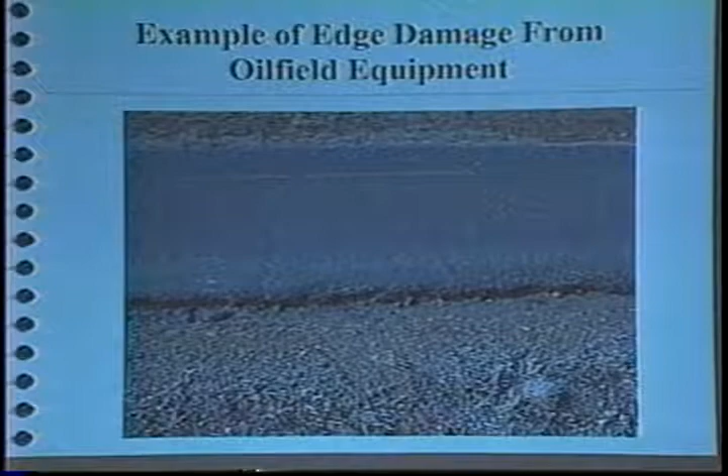The first thing, this is something that's not foreign to anybody. This is the typical type of edge drop-off that we have all over on our low-volume farm roads, those narrow farm roads. The thing about this particular road is it was a road that we were out there constantly pulling dirt back up to the shoulders and doing what we could to patch them up and stabilize them. In this particular case, this section right here where the edge dropped off about 1.5 to 2 inches, we'd been out there less than a month prior to this pulling it up.

When you've got, like everybody has, hundreds of lane miles of highway to maintain, you can't be out there every day. But I had about a 100-foot section, right next to a lease road where there was a lot of oil field traffic coming in and out and riding on that edge. For about 100 feet there, they had beat that edge back down into this condition, and that was the result of that 100-foot section.

That was a hot oil truck. They're big and square, not round, and they don't roll very well. They just kind of bounce, and that one went end over end several times and left the driver right in the middle of the road. Amazingly, the driver was sitting in the middle of the road, and he got up and walked to the ambulance, and they took him in to check him out, and last I heard he was okay.

I got to thinking about how much effort we put into edge repair, but it just doesn't seem like we get anywhere.

We're right back out there no matter how much we put into it, how good of a job we do. When we're on narrow farm roads with the kind of traffic we're dealing with, we're right back out there. And I was at the point where there's got to be a better way to do this.

And what are the best practices? Why don't we go around the state and find out what everybody's doing, and not only the state, why don't we go around the country, and do a literature review on other projects and studies that have been done about edge problems, and pool all that information together with some recommendations about material, methods, and equipment, and come up with a better way to patch edges.

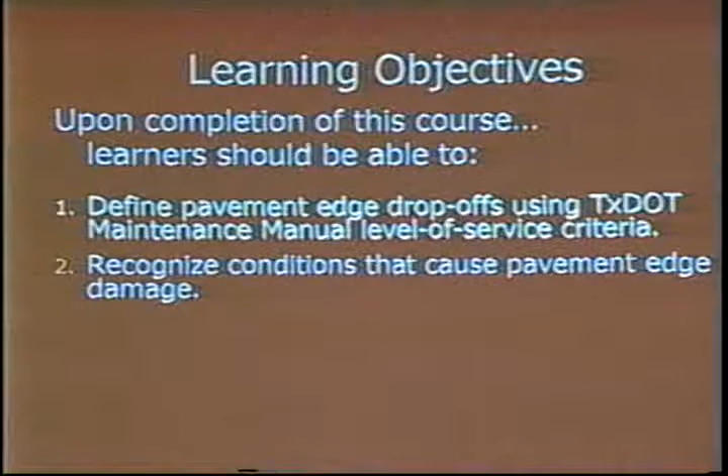And perhaps you might say, well, hey, I know all about that. But you may have some new people who come along and you need to be able to explain that to them. Hopefully you'll get some clear ideas about how you can communicate these typical things to look for. So this is an important part—if it's helpful to you, that's great, but I'm sure it'll be helpful for the new folks that come along. Distinguish among, select, and apply edge maintenance and repair practices and procedures.

I've never worked as a frame carpenter, but I know a few, and those guys walk around with a tool belt, and they've got a big hammer in it. Maybe it's their pliers, and they've got levels, and all kinds of tools in their tool belt. That's what we're talking about here, the tools you would have in your tool belt dealing with pavement edges.

This is what I'm going to present in this portion of the research: identify and deal with different types of edge maintenance equipment. Getting right on into tools, you can see how that would apply.

Edge maintenance planning tools. As Tracy mentioned, TXDOT spends a tremendous amount of money, much more than the 10-point-something million that he mentioned, on pavement edges. It's appropriate to do some planning to spend that money in a good way as stewards of state property.

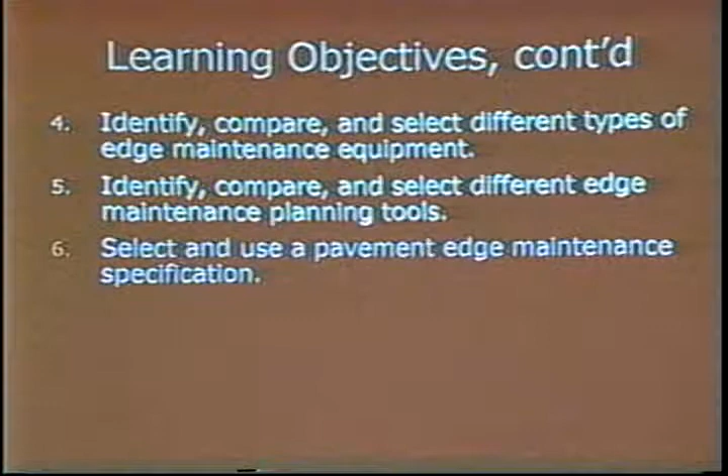We'll discuss a draft specification, the idea being that you may wish to contract out work like this or think about it, so we'll spend some time on that. And then finally, again, go to lifelong learning.

Having identified these objectives, this is an appropriate time to introduce some commentary from the director of your TXDOT Maintenance Division, Mr. Zane Webb. I have a brief two-minute film, which I'll show you here in just a moment. Zane's comments make it clear that this research on best practices for pavement edge maintenance is directly aligned with the policy and emphasis of the TXDOT maintenance division, the highest levels. So with that, let me roll Zane's tape.

The maintenance division is proud of the quality work they see from the TXDOT maintenance staff throughout the state. Everyone works hard, and we appreciate their efforts. Quality is not about us working harder — in fact, it's really just the opposite. It's about working smarter and efficiently. Maintenance accounts for 60% of TXDOT's budget. With this large a percentage of the budget, TXDOT looks to all employees to continually look for efficiencies and areas of improvement in their operations. To us at the division level, quality means results. It ultimately means doing the job right, being accountable. We pretty much leave it up to the individual maintenance sections on how to do the job. Sure, we're concerned about the final product, but how you do it is your decision. We encourage you to share successful ideas with each other and help us keep up the quality of service we provide the people of Texas.

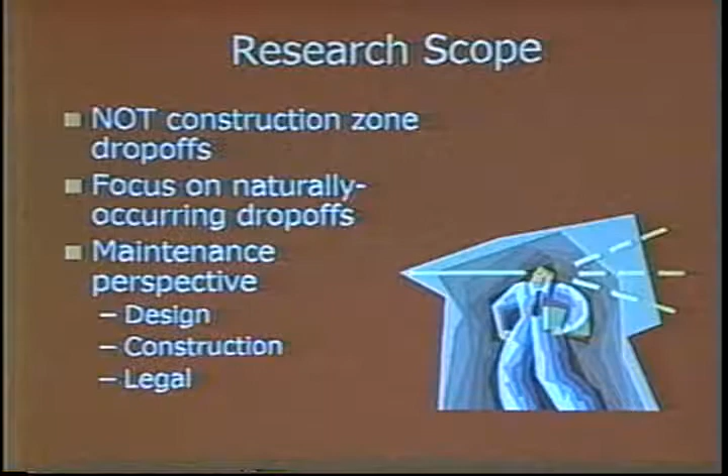We looked at both of these, but our primary focus and a lot of the emphasis of what we found, particularly in the West Texas area, dealt with low-volume roads without a shoulder.

And the way that we're doing this is through 7 regional training events, whereas I went to all 25 districts during the data gathering phase. The training phase, the implementation portion, I'm going out to 7 regional groups of districts. Our goal has always been implementation on this project.

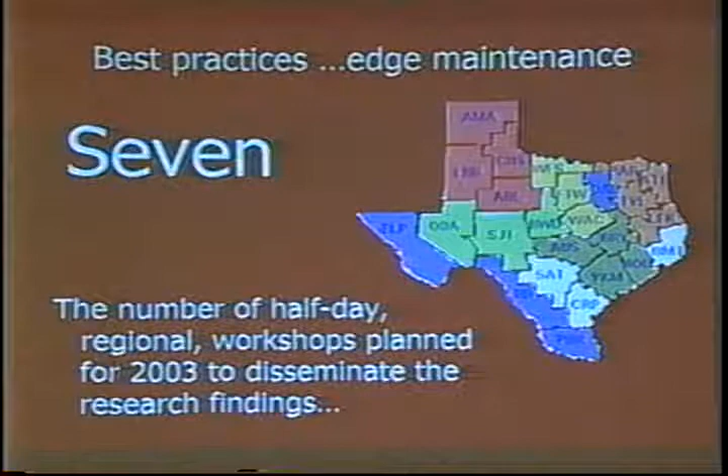We've always begun with the end in mind, that I'm going to have to talk to a group of maintenance section supervisors, assistant supervisors, crew chiefs, and other folks involved with the maintenance endeavor in the districts and in the maintenance sections, to talk with them about best practices for pavement edge maintenance, and that's what I'm here to do today.

Now that is the end of session 1. And if you're at the end of session 1 in your notebook, you probably will notice there's a pink sheet. This is a review sheet, so let's just talk about this for a minute. This is the audience participation time. There are 4 questions on the sheet, so let's just go through those and see if we're communicating pretty well. The first question, I always start out with the easy ones first.

This is my way. The edge repair research reflects the combined wisdom and experience of maintenance personnel from all 25 districts. True or false? That is true. That's exactly right. All 25.

Question 2, true or false? The research is primarily based on detailed statistical analyses of a lengthy questionnaire survey. True or false? That's false. That's exactly right.

We didn't litter. We didn't leave it on the side of the road someplace, but we had to get rid of that survey. That just was not an effective way to gather the data. We didn't do any detailed statistical analyses. We talked to people and we listened to people. That was our function, that was our goal - to talk and to listen, and then now to present to you the results of what we learned.

Question 3. Which of the following represents the key perspective? A, maintenance. B, design and construction. C, legal. D, all of the above.

I'm seeing a little bit of diversity in the responses I get on that. The answer is A, maintenance. Of course, we looked at all of the above. We looked at all of these, but our focus, the key perspective, is maintenance. This is for you. This is specifically for you.

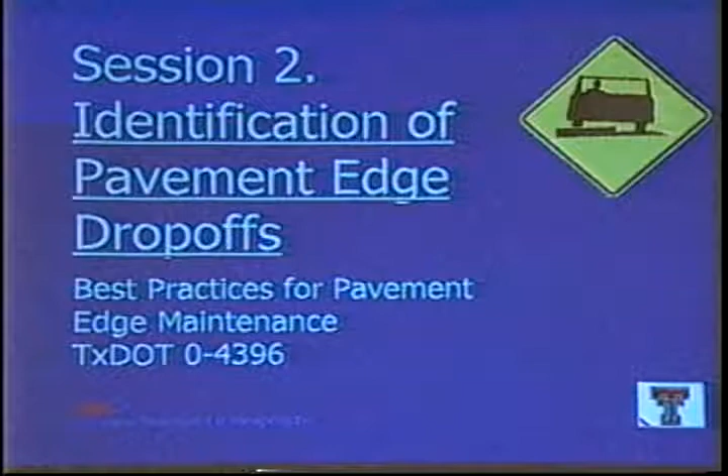Session 2 of this research deals with the nature of occurrence of pavement edge drop-offs, with a focus on identification. You might recall that we had 3 research questions showing here.

This session is quite important because it summarizes the findings from the first 2 research questions. The first 2 dealing with how to define or identify pavement edge drop-offs, and then the typical conditions that exist in the districts. I'm going to cover both of those in this one session.

The remaining sessions, sessions 3 through 8, deal with the third question, the best practices we identified in each district. But this is important because it identifies the context for the remainder of the training.

I'll basically cover this in 2 parts: first dealing with the identification of edge drop-offs, and then second, dealing with typical occurrences of edge drop-offs in the districts.

So here you have a picture and a number. What could that mean? What do we have there?

How are edge drop-offs identified in the districts? Well, the most common answer we got was 2 - the height of edge drop in inches, typically identified as the threshold for performing edge maintenance. This was the most common answer we got, but it was not at all the only answer, and in fact we had to continue to question to get people to say this, because this simple definition glosses over some key issues associated with pavement edge maintenance, and let me talk about those.

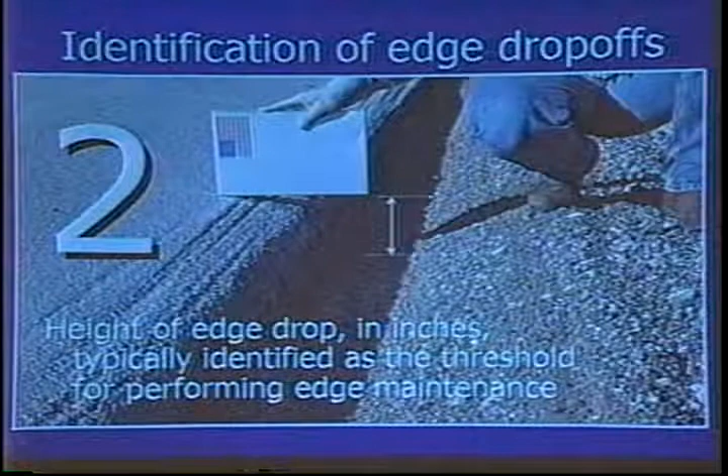Why is it important for us to think about this idea of how to identify pavement edges for maintenance purposes?

When we made our first site visit, we started here in Lubbock. Tracy Cumbie convened the group of maintenance section supervisors in the Lubbock district to visit with us, and he shared with me what I've come to call Tracy's Law: if you lose the edge, you lose the road. This is consistent with what Mr. Hopman was saying, that the key to successful maintenance for roads is to start with the pavement edges. If you keep the edge, then the rest of the road seems to go okay.

That makes a lot of sense. I've come to believe that this statement, Tracy's Law, provides a context for pavement edge maintenance. Everything we'll be talking about, if you think about it in terms of keeping that edge together, then you'll be doing well for the rest of your road. That context really is a mindset that I think you'll find very helpful when you get into pavement edge maintenance decisions. It helps you sort some things out and get some priorities clear.

So Tracy, glad you're here today. I should have had you say it yourself, but if you lose the edge, you lose the road. Now Tracy never claimed he was the first person to come up with this. In fact, many times today I'll share things, and the folks that shared it with me is the person I attribute it to, but you may know somebody who said it first. I'm not trying to misquote anybody, but I do want to give credit to the folks who were kind enough to share information with us.

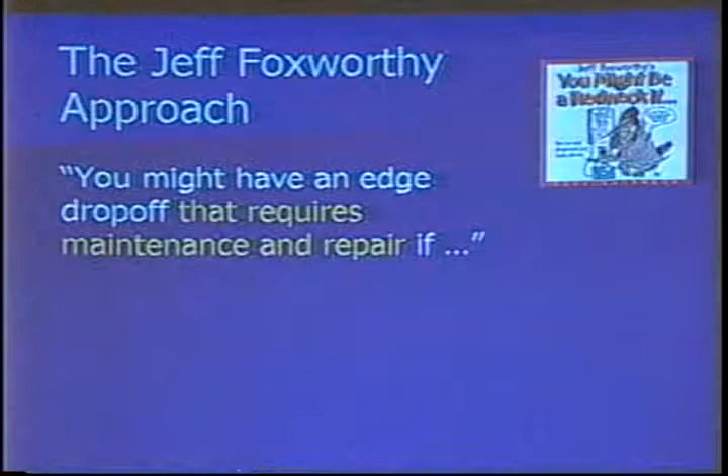I've come to call this the Jeff Foxworthy approach to identifying pavement edge drop-offs: you might have an edge drop-off requiring maintenance and repair if... Now, y'all know about Jeff Foxworthy, you might be a redneck if. I've got a list of some things here. You might be a redneck if more than one living relative is named for a Southern Civil War general. Does that apply to any of us here today? Okay. You might be a redneck if the primary color of your car is Bondo. This is one of my favorites: you might be a redneck if your family tree doesn't fork. That sends me. You might be a redneck if you think beef jerky and moon pies are two of the major food groups. If you had to remove a toothpick for wedding pictures, you might be a redneck. You might be a redneck if directions to your house include turn off the paved road. I like that one.

And then one of my personal favorites: you might be a redneck if you have a very special cap just for certain occasions that you wear. I like that one. I have a list here of about 165, and they tell me that if you hit on more than 20 of these, you might need some help. We might need some help. So I'll just keep moving.

But what I want to talk about is the Jeff Foxworthy approach to identifying pavement edge drop-offs. You might have an edge drop-off worthy of repair if, and it really falls into two categories. This is what you've told me.

The condition you see out there poses a safety hazard. This is what you all look for, this is a maintenance section way of looking at things. The second one is, not only is it a safety hazard, but there's more to it. What if the edge drop-off condition isn't a safety hazard, but it could cause damage to the road? That's something you've got to deal with.

Both of those criteria represent the thresholds you all look at when you ask, how do I identify pavement edge drop-offs? This is a classic and fully appropriate way for a maintenance section person to look at pavement edge drop-offs: is this a safety deal, is this going to cause damage to the road? If either one of those is true, then I need to put it on my list for repair. That's the way it's done.

Of course, there are other ways to do it. For example, written standards. Here's a picture, a nice edge drop-off there, about 8 inches, and a number 0.

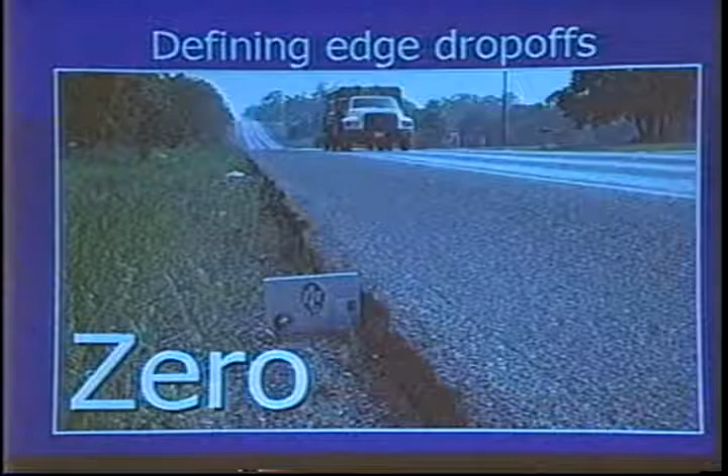What could that mean? Well, actually there are written standards for pavement edge drop-offs, but this is a typical number of written standards that you all identified when we asked, how do you identify these, are there any written standards out there? Actually, it was no, don't think so.

One of the reasons this is important in dealing with pavement edge drop-offs is that there are written standards for dealing with them, and they exist in various places, one being your maintenance manual, the TxDOT maintenance manual. So I've identified here a number 2, 3, and 3, and then a photograph showing an edge drop-off.

And the question is, what could that mean? Well, that is the TxDOT level of service definition for pavement edge drop-offs. Desirable: less than 2 inches. Acceptable: less than 3 inches. Tolerable: less than 3 inches.

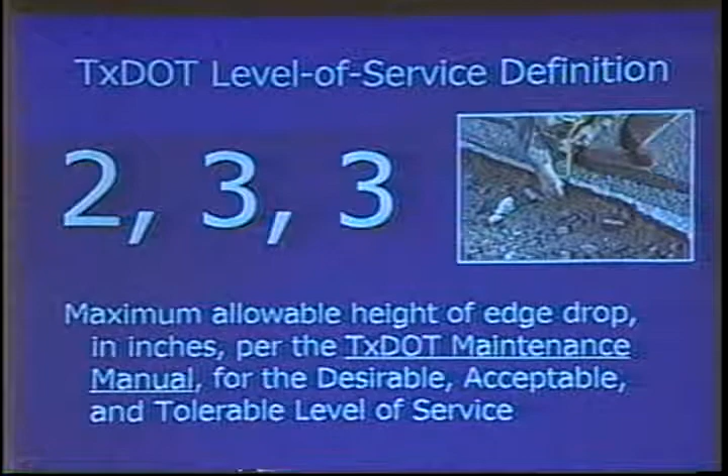And if you notice, after the page in your notes there's a handout, a Xerox of the page from your maintenance manual that presents this set of criteria. It says Section 2, level of service criteria. And on the back of the page you'll see a table in the middle of the page. It says pavement edges.

And under roadside maintenance, it says it is desirable to maintain less than a 2-inch drop-off, it is acceptable to maintain less than a 3-inch drop-off, and it is tolerable to maintain less than a 3-inch drop-off.

What that tells you is your maintenance manual, which is the way you've demonstrated or stated to the citizens of the state of Texas that you're going to maintain the roads, tells you that ideally you keep drop-offs less than 2 inches. And if they get worse than 3, you've said you're going to do something about it.

That's a written standard. Now the Jeff Foxworthy approach, safety issue or damage to the road, that's a maintenance section supervisor approach, and the facts are you've got to deal with both. The Jeff Foxworthy approach makes perfect sense from a maintenance section perspective. The written approach is required because it's in your maintenance manual, so you're legally obligated to do it.

And so anytime you end up in a legal situation, like this picture Tracy showed us of the oil field truck turned over on the road, and there's any kind of question in the court system about whether there was a problem or not, they're going to pull out this maintenance manual, pull up this table, and ask, is that greater than 3 inches? And if so, well guess what, that's not a good thing. So both of those are required.

And this is particularly required. I want to talk about this at various times today, but I just want to plant the seed now that this is an objective of the research: for you all to become familiar with and to know that these are the required standards for pavement edge maintenance per your maintenance manual.

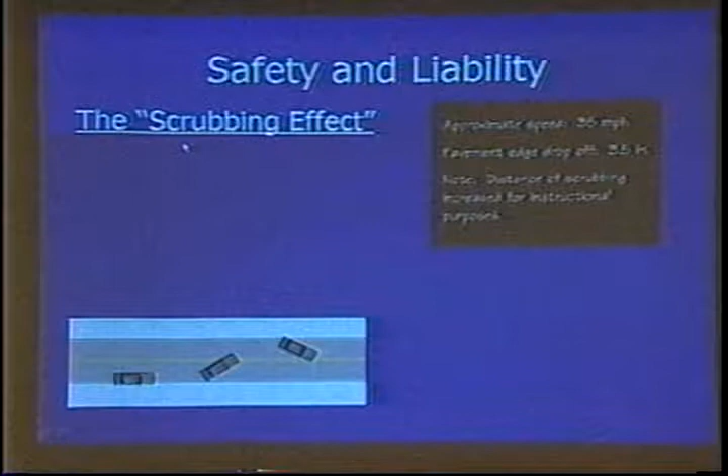One of the things I want to emphasize now, and why this is so important, has to do with something called scrubbing, the scrubbing effect. What is scrubbing? Why is this issue of pavement edge drop-offs a concern?

Let's think about how this works. Tracy's picture of a truck was very instructive when we started this. If you're driving along a section of road, say 100 feet, where there's a drop-off on the side, and for whatever reason you're looking over at some cows or a buck or deer, something that captures your attention, and you drift off to the side, your wheel drops off the edge and there's a drop-off there.

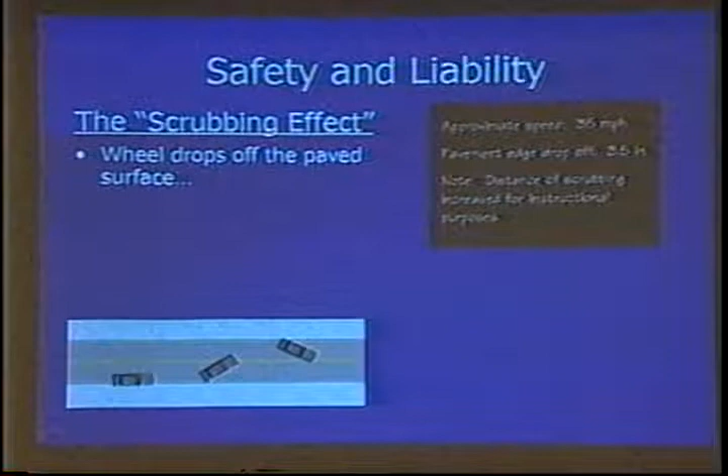Hopefully, being an experienced driver, you wouldn't try to just jerk it back on. You'd drive along with it for a little bit, then try to steer back up onto the pavement surface, to mount it. When you do that, the right front wheel — the one that's fallen off — encounters that pavement edge.

You've got the flat surface of the tire hitting square up against the pavement edge, which acts as a barrier putting force against the tire and keeping you from mounting the pavement. So you have to steer into it harder, continuing to increase your steering input until you get back up on top of the pavement.

What happens is, once you put enough steering input in, that tire, in one wheel revolution, goes from nothing to fully on the road. The vehicle automatically jerks way over to the left, as shown in this graphic. That's called scrubbing — the tire scrubbing against the face of the pavement. You can see how the vehicle yaws off far to the left, and if there were a vehicle coming in the opposite direction, that would cause an accident.

Or even if there weren't a vehicle over there, it might be difficult to recover from that and cause a problem. Well, this is a legal issue.

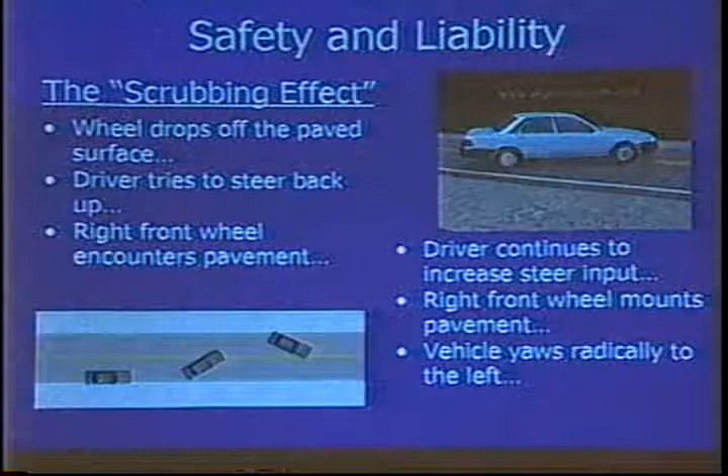Collision could occur, and that's a legal issue. And so this brings back the whole reason of why the level of service criteria are important. This is really what they're getting at.

The other thing I want to do to emphasize the importance here is to note that legal research tells us there is no consensus on the correct or allowable pavement height for edge drop-off for a naive driver. But they always say 3 inches, more than 3 inches is a bad thing. So notice what your tolerable level is: 3 inches, got to be less than 3. That's where that came from, is this research.

Also, it's desirable to limit the edge drop-off to less than 3 inches. Desirable, less than 2 inches. This is where your level of service criteria came from. It's intended to meet the issue of scrubbing, where a motorist driving along, the tire falls off the pavement edge and they get back on, nothing bad will happen. That's the whole idea behind it. That's why.

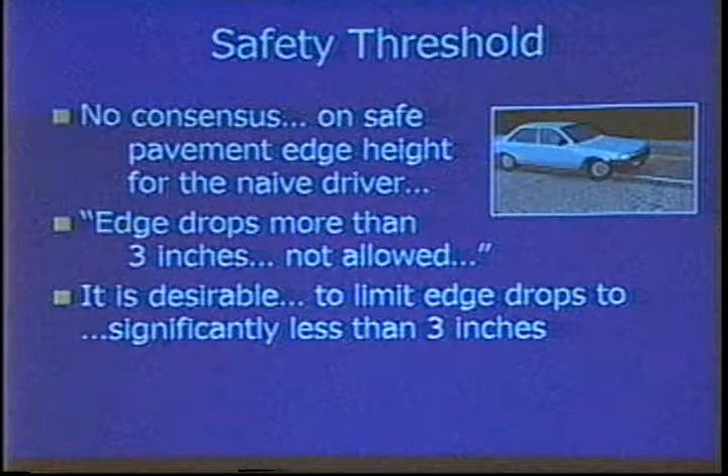And so from a maintenance perspective, not only must you think about this in terms of safety issue and damage to the road, but you also have a challenge before you to think about it in terms of the level of service criteria, because that's another obligation that exists in your community in terms of what you do to maintain your pavement edges. It's what your documents say that you'll do, and so it's important to think about it and focus on that.

Now, this brings up a good news, bad news deal, this idea of TXMAP rankings and pavement edges. You know about good news, bad news deals. I suppose there are 1,000 stories that start with, you've got some good news and some bad news.

One of these things that I get a chuckle out of: there was this guy, he goes to his doctor for a visit, and the doctor says, what is it? He says, well, I just don't feel very good, doc. I'm just not able to do the things I've been able to do. He goes, well, let's do some tests, let's do some blood tests, let's check you out. The guy says, okay. So he submits to all the tests, and the doctor runs them and says, I'll get back with you. He calls the fella in a few days later and says, well, I have the results in, and I have some good news and some bad news. The fellow's sitting down. He says, well, give me the bad news first, straight up, don't pull any punches, I need to know. And the doctor says, all right, I'll tell you, it's brain cancer, it's a large tumor, it's gone to your lymph node system, inoperable, there's nothing I can do. You only have a year to live. That's it, set your affairs in order. And the guy just kind of dies in a pile right there, and he goes, doc, how in the world can you possibly follow that up with good news? And the doc says, well, as it turns out, when we were doing our studying, we also found you have an aggressive case of Alzheimer's, and in 6 months you won't know what's happening to you. So it's a good news, bad news deal.

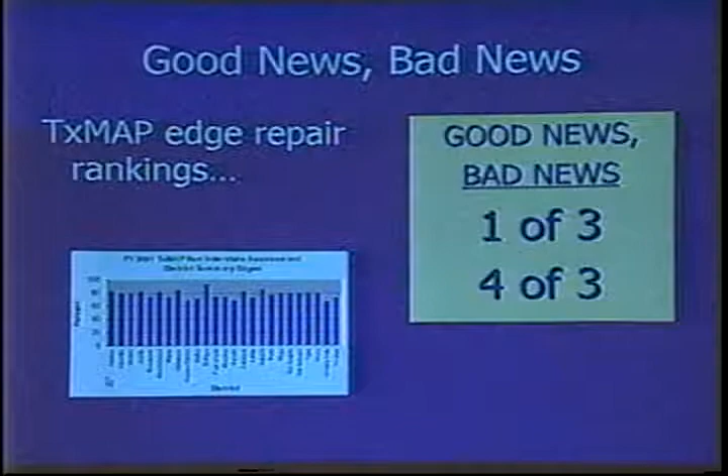But the bad news is if you make it on the bottom of the list on edges, you are the bottom of the list overall. Let me tell you what I mean by that. Of the bottom 4 districts for edges, 3 of those are the worst on overall ratings for TXMAP in the state.

If you made the bottom of the list in edges, you're the bottom of the list overall. Understand what I'm saying? If you lose the edge, you lose the road. That's what that tells you. That's the bad news. If you make it to the top half of the list, you might make it up there in the top 3 overall. But if you make it on the bottom of the list, that's where your problem is. It just straightens it right out. If you lose the edge, you lose the road.

Now, I told you I was going to discuss this session in 2 parts. The second part has to do with typical edge drop-off conditions that we identified as we visited throughout the districts. Let's talk about this as you've got to know them when you see them. So let's move on and talk about that for a minute.

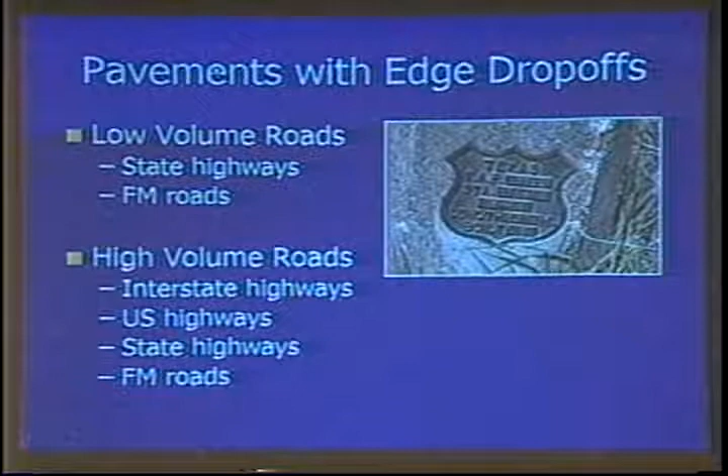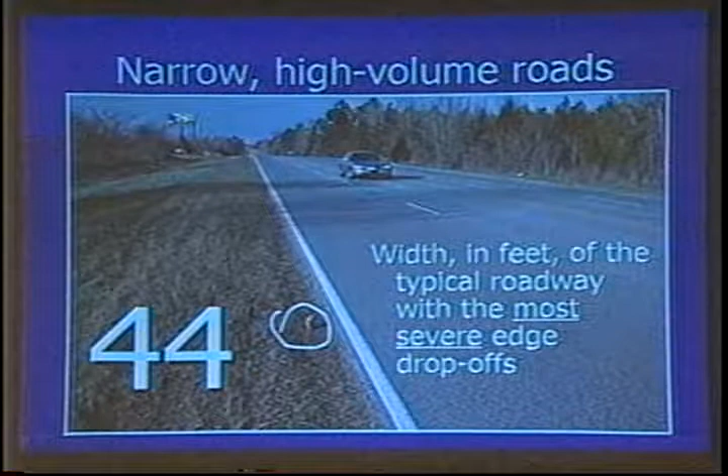We saw lots of things that affected pavement edge drop-offs. Again, we didn't do any detailed statistical analyses, but the unscientific top 3 were these: the idea of narrow roadway, specifically narrow roadway without shoulders, and then abusive traffic, and then adverse environment. Now, time won't allow me to go into everything we learned here, but what I'm wanting to point out is that a number of factors cause pavement edge drop-offs.

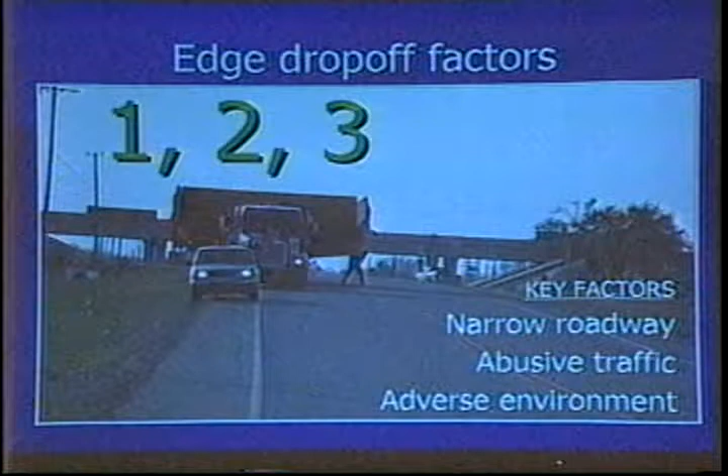Well, this isn't just the Laredo thing, though. Here in West Texas, Tracy mentioned oil field traffic. Well, there's also cotton module traffic. You all have seen that. In Central Texas, it was moving homes, mobile homes, wide traffic like that causing problems. In East Texas, it was boat and RV traffic going out to the lake. Also in East Texas, timber haulers. In Dallas and Fort Worth, it was the soccer moms and their SUVs, taking the kids, just driving, lots of traffic. It was always something.

The problem is consistent. It's just that the cause of the problem in terms of too much, too wide, too fast exists. Traffic is always an issue. What it amounts to is you have a FM road system that's 50 or 60 years old at this time, designed under the program Get the Farmer Out of the Mud, back at a time when the trucks for farm traffic and those sort of things were a lot smaller and slower than they are today. And the world we live in today, 50 or 60 years later, is a lot faster. The equipment is larger, heavier, and it just does damage to the roads. That's what it amounts to. So you have a kind of system overload problem, and that's what you're up against, facing that kind of challenge of dealing with the system overload problem from a maintenance perspective.

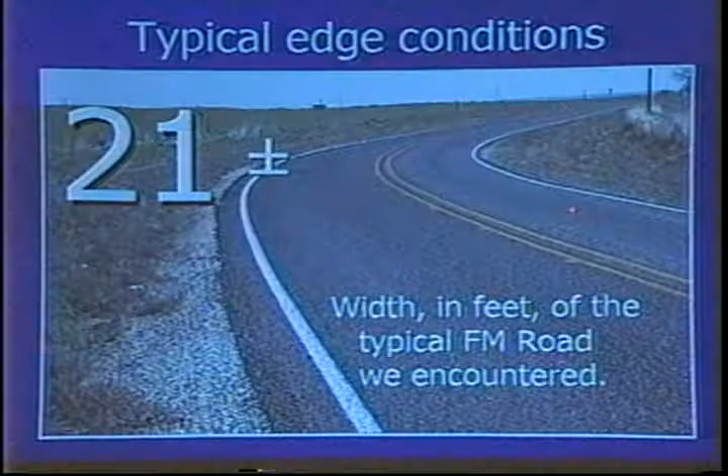You know, Tracy mentioned that I did a nationwide literature review. And I also not only did that, I called people, a sampling, maybe 15 or so of the equivalents of the Zane Webbs of the other states. I'd call and talk to the director of maintenance for the state and ask them what they thought about edge drop-offs, and I was talking about edge stripes. And the guy said, 'You're not from around here, are you, son?' And I said, 'What are you talking about?' He goes, 'That's not a stripe, that's a line. This is a line right here.' And I said, 'Oh, okay, I'll start calling it a line.' And so I've been corrected.

This idea of edge drop-offs, there are certain places where that shows up more frequently than others. For example, inside horizontal curves, intersections, approaches to hills, etc. I have a few photographs that show those, and I'll just go through those for you right now. And again, I'm thinking that you all might say, well, yeah, I know that. But the idea is that if this is something that's real familiar to you, then it also might be helpful for you when you go back to your maintenance section and you're talking to the folks that are coming in, new hires or whatever, and you're wanting to train them and share with them.

These are things to look for. And I might just say that I would attribute this to a guy named Bill Boatwright. Some of you may know Bill Boatwright. He's in the Laredo District, maintenance section supervisor there, and he's a very observant fellow. He's just a real careful guy, pays a lot of attention. He was talking to me about how to tell when a buck deer has achieved its full prime in terms of the size and weight of the horns, its spread and all that sort of thing, and how you can tell the difference between a 5-year-old and a 7-year-old. He's just a very observant person.

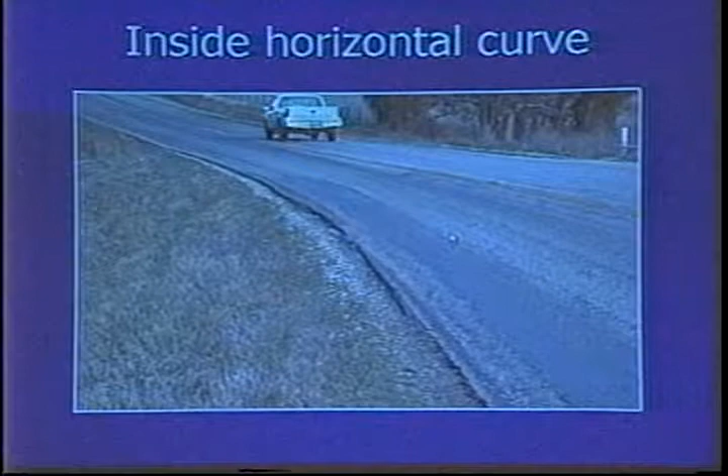He carries that same level of observation skill over into identifying typical ways where you identify edge drop-offs. Some of these things he specifically talked to me about as something to look for. That's what I'm talking about. I mentioned that the most severe edge drop-offs were the poor boy 4 lanes, but the most common that we saw across the state was this right here, inside horizontal curve of a narrow FM without a shoulder. This actually happens to be in Mills County, but it could have been anywhere in the state. Probably 3/4 of the districts identified this as the most common thing that they saw in their maintenance sections. So this is a problem, narrow FMs inside of a curve.

Another one, and this didn't occur to me at first, but it makes a lot of sense: it's the approach to a vertical curve, and that's what you see here. Notice that you have a narrow FM.

This happens to be in Hartley County, ADT 220 vehicles per day. They've been doing some edging there, but notice that along the side of the road there's a wheel path as you go up the hill. If you're driving along on a narrow road like this, you don't know what's coming across the other side, so you'll instinctively pull over because you don't want to encounter that on a narrow road. Anywhere you approach a vertical hill, you're going to see a propensity for edge drop-offs like this, wheel paths right along the side of the road. Very common. That's a 21-foot wide road.

This is not a narrow road, but it is a problem. This happens to be in Wise County, and ADT here is 5,200 vehicles per day. This road has 12-foot travel lanes and 5-foot shoulders, and it's got about a 4-inch drop-off along this area. Real good, strong subbase - not rock, but a real stable material.

What happens is when vehicles are driving along and there's a place of business over here and they want to turn left, they just stop and wait for the oncoming traffic to get out of the way, then make their left turn. And those folks out in this part of the world are impatient. So instead of waiting back behind for the person in front to turn left, they pull over, take one set of tires off the pavement, and drive around and pass on the right. Creates a serious edge drop-off problem. In that sense, the shoulder kind of is an attractive nuisance, whereas shoulders are typically a good thing. In this case, the shoulder ends up providing a stable base, so they feel like they can pull over and get away with that, and they do. It causes its own brand of edge drop-off problems.

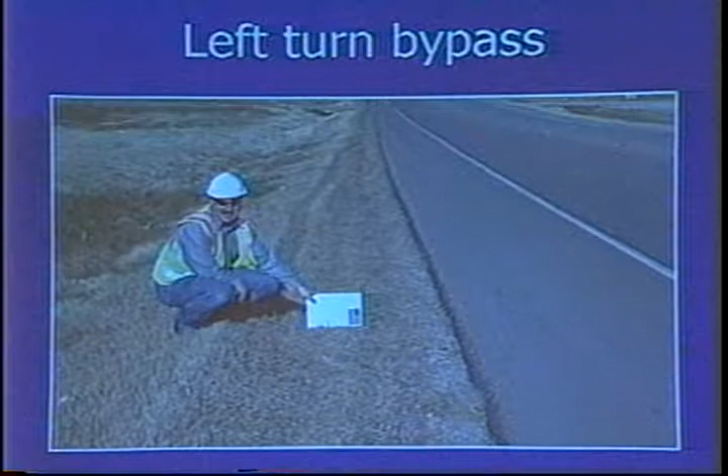Illegal in urban and metropolitan areas, this is a problem - people just turn wherever they want because they can. This happened to be in Bexar County, on the interstate highway. Notice the edge drop-off here where people are making illegal turnarounds. The district or maintenance section folks ran post and cable, and wherever they stop the post and cable, they get the illegal turnaround. They run it back a little further, and they get another one. That's a continual battle for them.

That's not a pretty picture - this is a truck pull-off. Again, this is a service road for an interstate highway. Trucks pull off, check their load, do whatever it is they need to do, and just trash the edges. A lot of times this happens underneath bridges. In the high traffic areas, it's a very common edge drop-off problem.

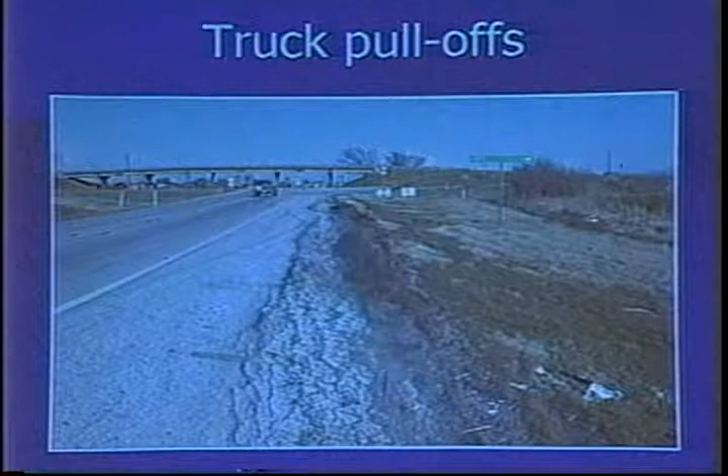We did no sophisticated statistics, but what I would say in general is that the severity of the edge drop-off is positively correlated with these factors: no shoulders, narrow pavement width, narrow right-of-way, abusive traffic, heavy traffic, age, erodible subgrade, precipitation. As you start seeing those factors show up, you start seeing your edge drop-offs get worse.

Now, the neat thing about the state of Texas is that in most places, most of these factors don't occur at the same time. When you really start having serious, awfully bad edge drop-off problems, it's when all of these occur at the same time, because there's nowhere to go with it. Most districts have their saving graces - either their soils are good, or the traffic's low, or they've got plenty of right-of-way, or whatever. But some places, and there are a few, have all of these bad at once, and those places have some really serious problems. That's not y'all - y'all have your own share - but there are some places, believe me, where folks have every one of these. It's a bad, bad deal. So the severity of the edge drop-off is going to increase as you see these factors exist, both in number and in severity individually.

Okay, we are to our pink sheet, and I'm pretty close to on time. We're going to get you a break here in just a second, but before we do, let's go through our pink sheet. What is Tracy's Law? Question 1.

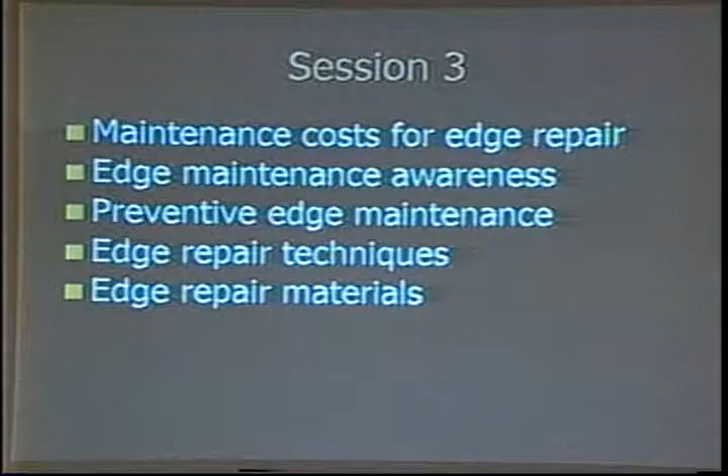In fact, according to your data that I got from Joe Graff, y'all spent $11.4 million in 2001 on edge repair, function code 270. But the point of this little exercise is to illustrate that you do much, much more than function code 270.

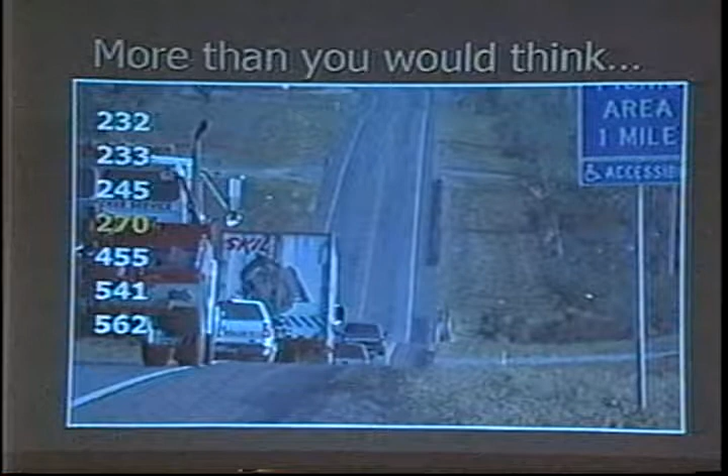One of my favorite photographs from this, I just like it. I don't even know what it is I like about it, but it is a nice photograph. Notice along the left side there some other numbers. Those are also function codes. What function codes are those? Well, they're common edge repair function codes.

When we went to the districts, we heard about 22 different function codes mentioned. When we've asked people about edge maintenance, what do you do? They say, we do this. Well, what function code do you bill it to? Well, I'll do this. 22 different ones.

And these were the best of show right here. Of course, 270 being front and center, that's a no-brainer. But these others were very commonly used. And you can see how some of these make a whole lot of sense for edge repair. Now, some of them include more than just pavement edge repair, too. For example, strip seal.

Y'all don't just do strip seals on the edges, but you do strip seals on the edges. And so maybe that's not all associated with pavement edge maintenance. Fog seal, same deal. What about adding and widening pavement? Well, that's probably edges. Pretty hard to get away from it there. Reshaping unpaved shoulders, that's edges. Chemical control of vegetation, control of edges, reshaping ditches.

These are all very common, the most common, in fact, that we encountered. So if you look at this, my point is those 7 edge repair function codes, instead of just $11.4 million, that's about $40 million. You say, well, you didn't use $40 million. Yeah, because not all that's edge repair. But a lot of that's edge repair. I even go so far as to say most of it's edge repair.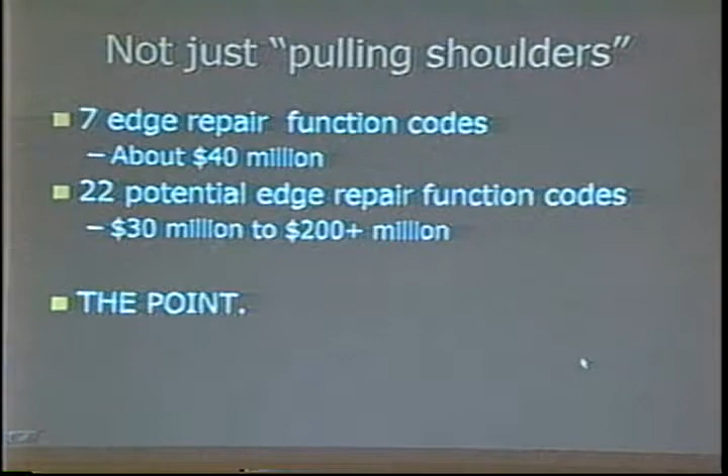Plus there were 22 different function codes that were identified, and if you add the 22 together, it's $217 million, all of those. Now, y'all didn't spend $217 million on edges, but you sure didn't just spend 11. So maybe you spent 50, maybe you spent 30. The point of this little exercise is to point out that you all spend a lot of money on pavement edge repair, a lot more than just function code 270. That's the purpose of this illustration.

So it's a significant part of what you do. It's not just one thing, it's a big part of what you do. And so from this point forward, I want to present to you the best practices for pavement edge maintenance that we identified in our research study.

I'll begin with awareness. Now, when I began the research, I did not initially think about this as a best practice for pavement edge maintenance. But when we started looking at all the things that are done in this area, it became clear to us that some of the techniques that you all were involved with were really just awareness things, keeping it in your mind, and really to a large extent keeping it in your mindset and thinking about it from the perspective of this is an activity that's important associated with maintenance in your sections. That's a big deal. So let me talk about some edge maintenance awareness things.

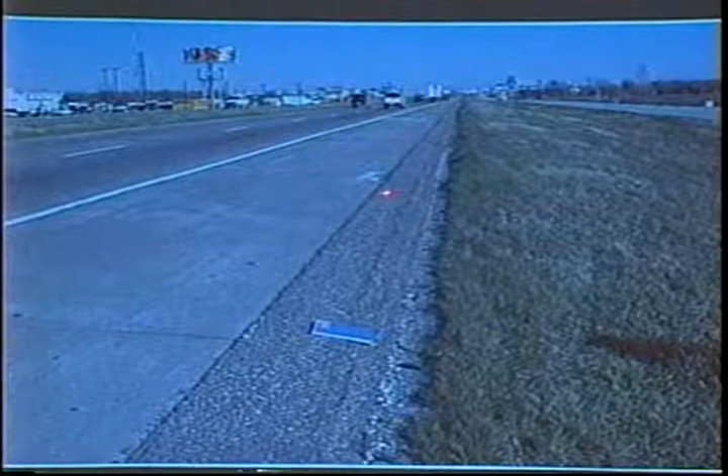One of the first ones we encountered had to deal with the design phase, focusing on edge maintenance details. Let me draw your attention to this photograph. This is in Rockwall County, Interstate 30. Notice this is a concrete pavement structure, concrete shoulder and travel lanes, and then notice right here on the edge this strip. Well, that's an asphalt wedge. Okay? That's an asphalt wedge.

This is an excellent design detail for a high-volume road. The reason it's excellent is that the subbase for this pavement doesn't stop at the edge of the shoulder, it comes out to about here. So you have this zone between the edge of the shoulder and the edge of the subbase where nothing really will grow, and they put in an asphalt wedge.

So they're not going to have an edge drop-off problem there. This was one of the sections on Interstate 30 we looked at. Unfortunately, we also looked at other sections on Interstate 30 built after this where the person who did the design didn't think about pavement edges. This is why this is awareness. It's thinking about it.

What that person did is rather than put this wedge here, they put nothing. So instead of a slope from the edge of the shoulder to the edge of the subbase, they went straight across and then up vertically about 10 or 12 inches, whatever the thickness of that concrete was. Then they said, well, we'll blade soil over in there and try to get something to grow. But it just isn't growing out there. It's just not working. So they have a continual edge maintenance problem on a road that was brand new. That's an incredibly frustrating thing for you all to deal with.

It all comes down to introducing the idea of edge maintenance in the awareness phase into the design. We saw more places than I'd like to mention where design details on a new, basically rehabilitated, road ended up causing you maintenance problems from the get-go, when it should have been one you didn't have to worry about for a long time. That's what I'm talking about when I'm talking about awareness.

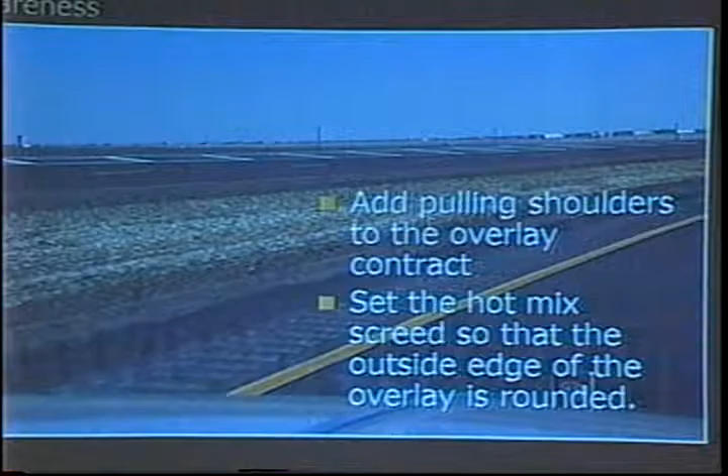The thinking of the folks in Brownwood on this course as an edge maintenance awareness practice is that you've got a lot of roads to look out for and a lot of problems to deal with, so you're always having to make judgment calls on where to put your effort, where to put your emphasis, because you've got more than you can say grace over, as we look at it. Faced with that kind of decision, how do you make the call? Well, if risk and liability to TXDOT figures into the picture, and it does, this course sensitizes you to the kinds of risks and liabilities associated with maintenance operations, one of them being pavement edge drop-offs.

So the Brownwood District sends all their maintenance section supervisors to this course, and they commend it to everybody. They say it was money well spent, that everything you do on a daily basis deals with this, and they liked it. So I pass it along to you as an idea to think about.

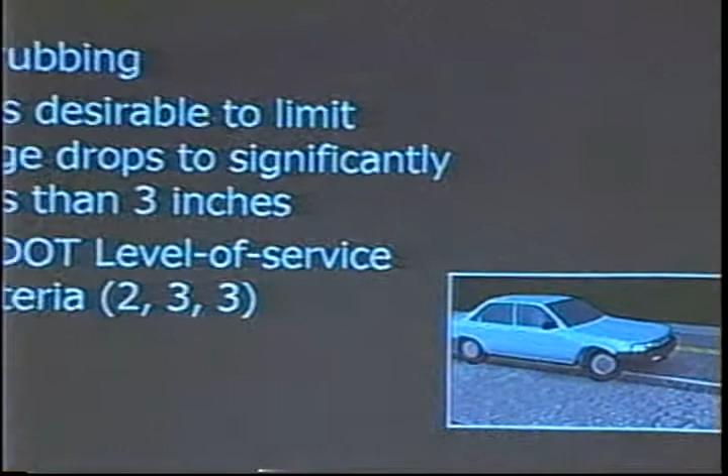I've already talked with you about this liability thing. I want to talk about it a little bit more formally because I was curious. One of the things you hear a lot about is: is there a liability issue, or not? I really wanted to know.

So I talked with you about scrubbing. What I did was go to the Texas Attorney General's office, where they have an assistant attorney general named Ron Garner, who's in charge of dealing with this kind of issue for the Texas Department of Transportation. I asked him, what records do you have dealing with pavement edge drop-offs? He gave me the typical thing, like 'if I told you I'd have to kill you.' I said, well, don't go there.

Well, anyway, he did look. They keep records, some of which they're willing to share and some they can't because those projects or cases are still open. But of the cases closed over the past 10 years, he sent me a table, and this is a summary of it. I have that information in my hands, so let me go over it with you. He said since 1990, they've tried 35 cases.

Now, he wasn't willing to talk about cases he was still dealing with. Of the 35 edge drop-off cases, 13 were in a construction zone, 10 were not in a construction zone, and for 12 it didn't say one way or the other. The edge drop-off height ranged from 2.1 to 8 inches.

Let me read through a few of these with you: loose gravel with edge drop-off; soft shoulder edge drop-off, a mowing maintenance problem; 4-inch sloped edge, muddy shoulder; 4-inch sloped edge drop-off; 5-inch sloped edge drop-off; 8-inch edge drop-off, open and obvious; 2.1 inch drop-off; 3 inch edge drop-off; 4 inch sloped edge drop-off; 5 inch sloped drop-off; 8 inch edge drop-off.

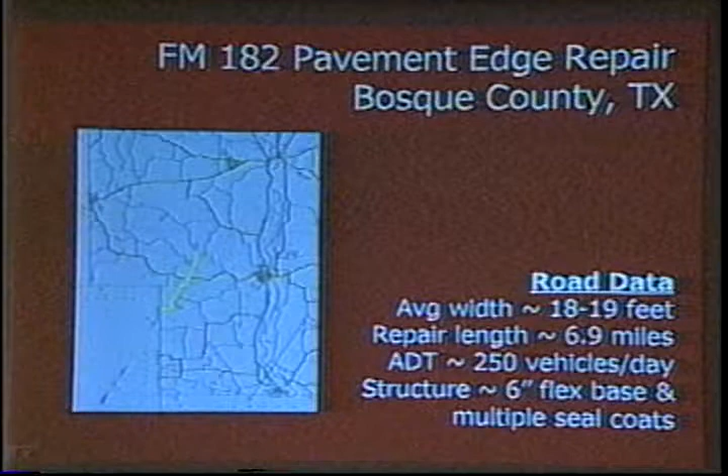This is FM 182. Typical width of this road, 18 to 19 feet, because the road base crown was wider and the edges had broken off, so they just didn't have as much road as they wanted. They wanted to rebuild those, and they had about 7 miles of road which they rebuilt. The defect was pavement rutting and pavement edge damage. That's what they were trying to correct, again on the existing base crown. So let me roll that tape for you.

This is what some of our edges are looking like before we fixed them. Just a good drop off and narrowing the road, chewing off the edge of the road.

First step here, we heel the dirt away from the edge of the pavement. We're just cutting off the edge of the pavement and edging out the loose stuff about 2.5 inches deep. It makes our hot mix lay a lot better.

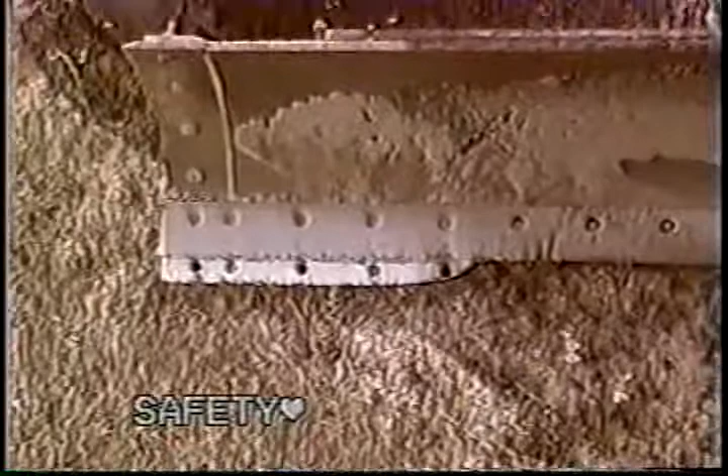This is what we're using to heel off up against the curb, edge of the highway, where we're coming back and putting hot mix on it, repairing the edges. This is about 2.5 inches lower than your grader blade, and it heels it off pretty good, gives you about a 2 to 2.5 inch depth for hot mix going back on your edges.

I'll show you in a minute kind of what we're doing. This is what it looks like after we heel it out. Gets us something to work with to put a reasonable amount of material back in its place.

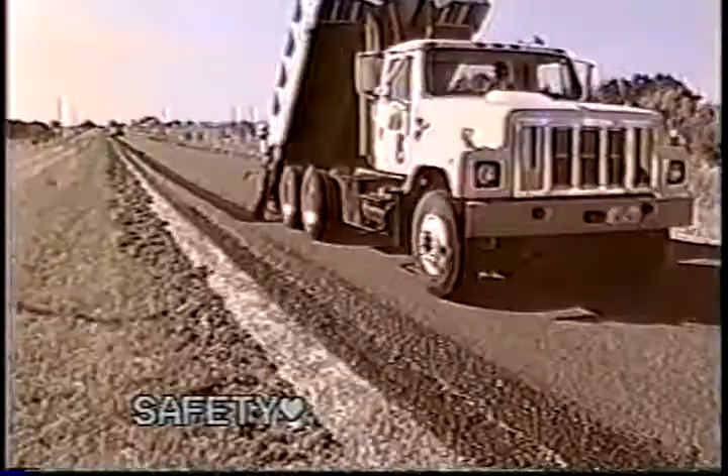Then we're going to come back and we tack the edges of it, the edge of the road. This is our conveyor boxes that we bought to put on. They sure do work good.

Then we come along and we put a windrow. We got our motor grader with a little box built on one end. It's sitting at an angle, and we just windrow that out to the edge like we want it. If you'll notice, Bobby's doing a good straight job on the edges, and that picks up all these edges.

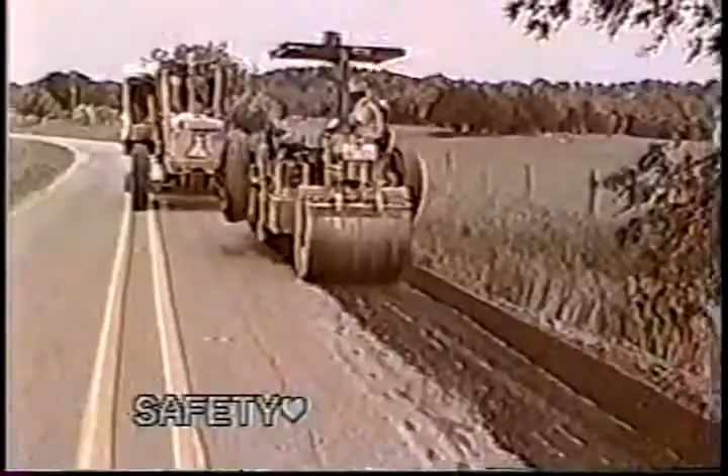And our maintainer comes along and knocks the road down. During this operation, we are cautious about the operator not breaking over the edge of this. It keeps it nice and uniform.

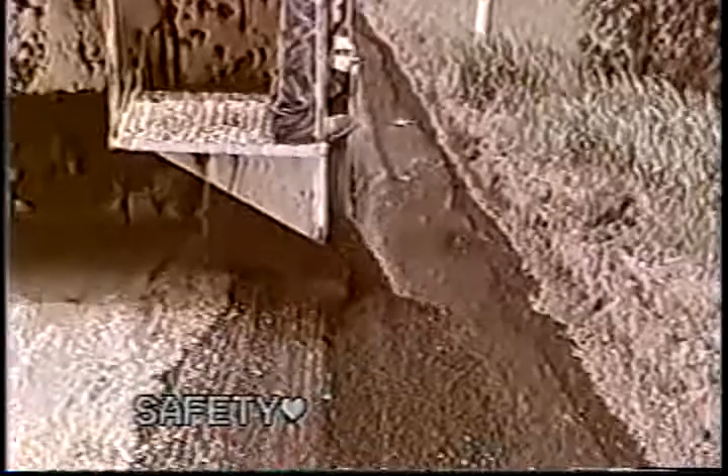Sometimes you have to make a second pass to bring it up as high as it ought to be. That's no problem. This is what it looks like after we get through, and then the seal coat will come over and cover it all up, and it'll look real good.

We're using convoy trailers for our flaggers because we are a pretty fast moving operation. This sure does help these old narrow roads to do stuff like this. It's a good fast moving operation and does a good job.

This is kind of what it looks like after we finished, after we've pulled up the edges. This is FM 182 after we did this previous shot that I had on this film. This is after we done the shoulders and got it restriped and everything. This is what it looks like.

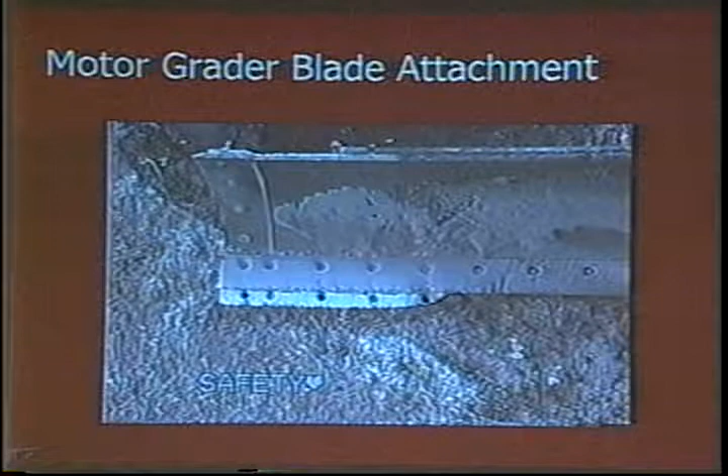But they've got this attachment. They place the tack coat after they heel that back. Then they place the material in a windrow using their side discharge chute. They were using Type D hot mix on this operation.

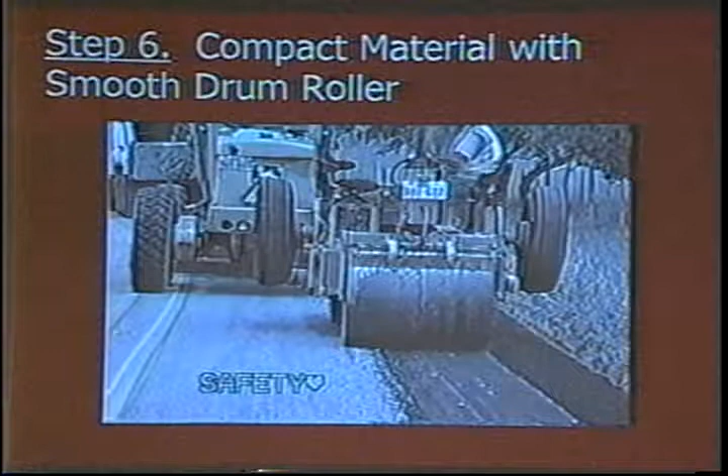They knocked that windrow down with a motor grader blade, got the little box attachment on the end, rolled it with a smooth drum roller, and then, of course, one of the things they had to do after they were done was pull up the edges.

If you think about it, doing this kind of operation will rebuild the pavement edge, but where you might have had an acceptable edge drop-off before, after you're done you're not within acceptable limits anymore. So they would have had to pull up the shoulders along the soil at the edges, and then they would have done this associated with the seal coat operation, got a seal coat across it, and restriped it, and it'll look great just like this.

These are the data on this. Every time someone offered to send me a film like this, I'd call them up and ask them some questions and try to summarize the kind of information that you all would have interest in. These are the data on this particular project.

Let me just draw your attention to a couple of things. It's a lot of hot mix per day - I've had people comment on that before. This was their price for hot mix. This was their cost per centerline mile for doing what they were doing on this particular application, $7,050 per centerline mile.

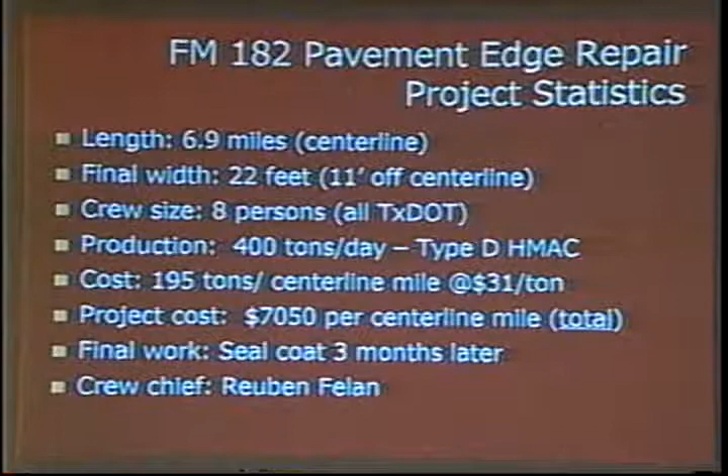They seal coated it later and then restriped it, as you saw. Reuben Felan was the crew chief here, and the folks in the Bosque County maintenance section, Jerry Thompson being the maintenance section supervisor there, would be the people to call.

So give them a call if this is something that you think would be helpful to you for your particular applications where you're losing the edge of the road like they were. You could see how a person thinking about pavement edges - if you lose the edge, you lose the road - would lead them to think about going back and reclaiming some of that edge so they can take care of their road the way they want to. This is directly related to that.

Let's talk about some other preventive edge maintenance techniques.

The idea behind sealing cracks, raw edging, is to keep the edge of the pavement alive. Many of you here do that. I have a list of some of the districts who do this sort of thing: Amarillo, Childress, Laredo, Lubbock, Lufkin, Odessa, Paris, Pharr, San Angelo, Tyler, Wichita Falls. Those were a few that mentioned it prominently when we talked about things they did.

The thinking is that as your pavement edge cracks, the surface starts to oxidize and starts to wear out, and putting this emulsion or asphalt on the edge will help keep that alive, prevent moisture infiltration, and just helps keep the edge together. Again, if you keep the edge, you keep the road. That's the idea behind it.

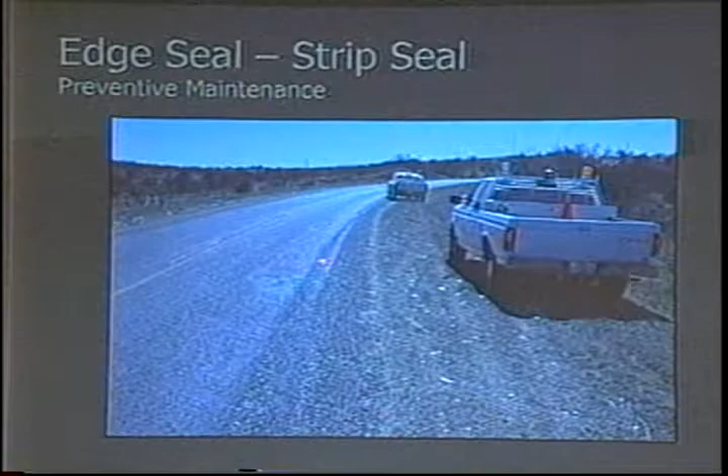You can see that, it's obvious in this area along the edge of the road. One of the things mentioned to us is that this is certainly a good way to keep the edge together, to take care of the pavement edges. The concern is that if you get too much buildup of aggregate on the edge, you might trap some water, which can cause its own problems. But if you're careful and able to do it, this works very nicely. Commend it to you.

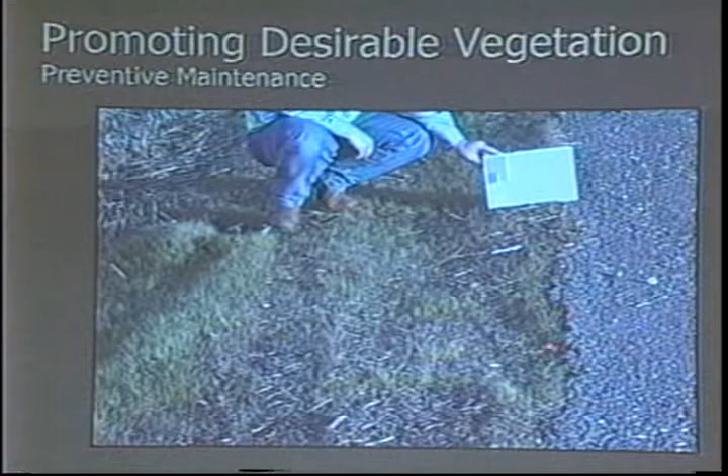Vegetation, of course, was prominently discussed throughout the state. This is in Wise County. This particular case is a pretty wide road with a shoulder, and adjacent to the road there's a large strip of base material with a drop-off of 2 or 3 inches. They did a test strip where they were adding vegetation, the idea being the vegetation next to the road would buttress this edge and keep it from peeling off.

This was interesting to me, and I encountered this throughout the state - by and large, most everybody we talked with said they thought vegetation next to the pavement was a good thing, but vegetation on the pavement was a bad thing. So it was always trying to fight that line. But vegetation being next to the pavement was always viewed as a good thing - it helped hold the pavement together, helped hold the edge there.

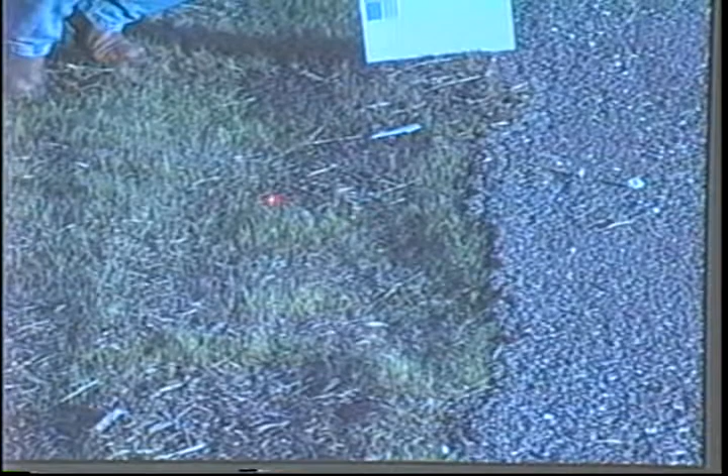This is kind of interesting to me, particularly being an engineer. The way I was taught pavement edge design was that next to the road, you didn't have vegetation - you had just a transition zone of base material or soil, but you didn't put vegetation next to the road because of the moisture it might introduce into the pavement structure. But you all are telling me, and this is accepted throughout the state, that controlling vegetation next to the pavement is a good thing. I've come to agree, and many people have told me how the maintenance burden on these roads has dramatically decreased. Several years ago the standard procedure was to blade all this off and have nothing but free soil, no grass whatsoever. That changed to allowing vegetation to establish where rainfall would support it, and that was a good thing - it really helped a lot.

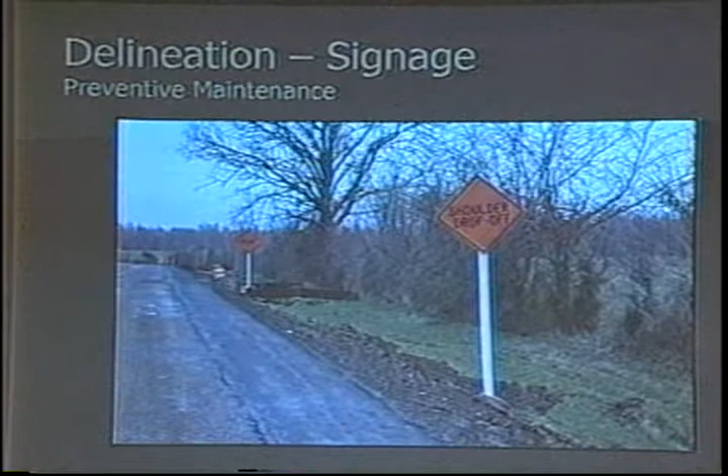Speaking of delineation a little further, I put this in just for fun - there were some special techniques used throughout the state. Notice that edge line, that shines, right? That's a really bright one. This is in the Atlanta district, and here's a close-up view of it. This is called inverted profile pavement marking - there's a special specification that deals with that. What it amounts to is this marking is textured. You can see these little crimps in it.

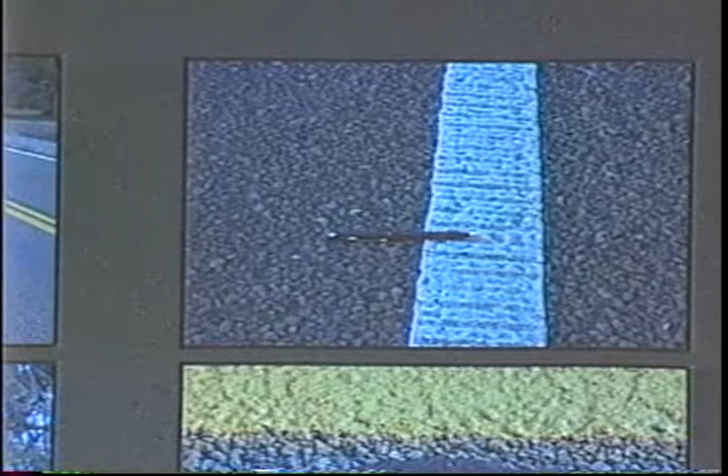It ends up being something like a rumble strip. You know how on divided U.S. highways you have the rumble strip that'll really wake you up if you're driving along the road - well, this little 4-inch inverted profile marking will also act as a rumble strip. If you're on a hot mix surface road, so it's smooth, it'll give a real high-pitched whine. It's very noticeable, the road noise. If you're on a road that's seal-coated like this one, you can tell it's there, but it doesn't add a lot in terms of noise. The thinking was they had sections of road with a lot of rainfall, which makes edge lines harder to see, and also certain sections where the accident or damage rate was viewed as more problematic. Because this is pretty expensive, they selectively put it in places where it would do the most good.

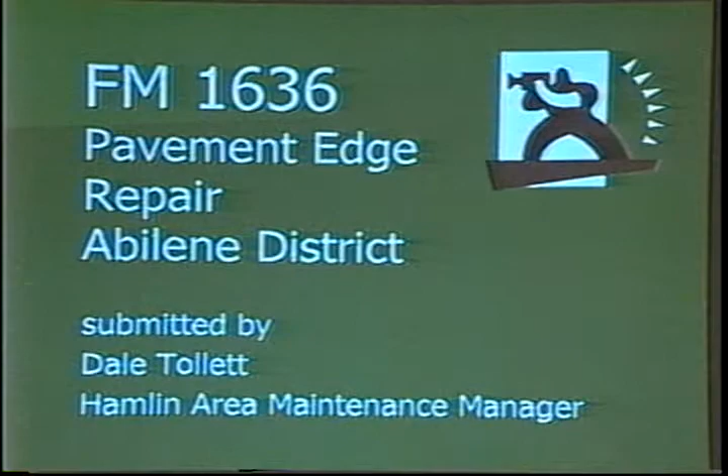I've been told that this procedure has been used in other areas. In Brownwood District, for example, a guy named Jim in Mills County, Jim Smith, Buddy Morgan, some others. But Dale Tollett was the fellow who took the time to photograph this and show this to me, and so I do appreciate that.

This is an edge repair done on FM 1636. There's Dale, the picture of Dale right over here to the right. I also saw Marvin here, and Jack, and Martin—I don't know if Martin's here, I hadn't seen Martin this morning. And Brian Crawford came to one of these earlier. But there's Dale on the right.

This is the road, FM 1636 in Jones County. It's not necessarily a narrow road, it's about 2 miles in length, real light structure—y'all can relate to this, this is West Texas. The problem with the road, the defect, is rutting, quarter point failure, and edge damage. You can see how that's the problem. There's a picture showing some of the rutting and then some areas where the edge is gone.

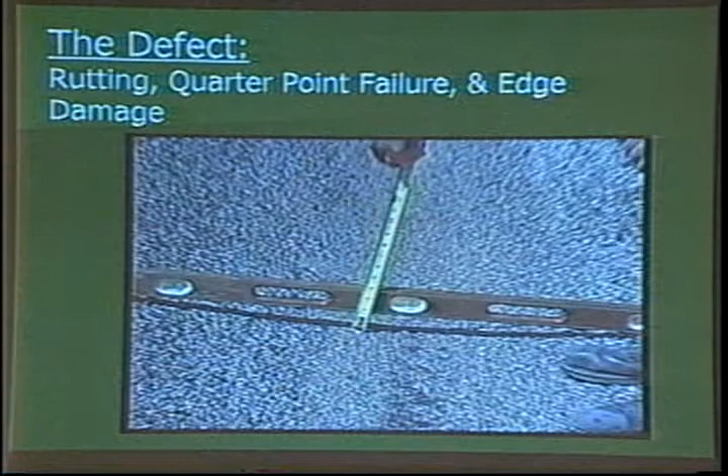Let me roll this tape for you that talks about the way that Dale and his folks solved this problem.

This is Bill Lawson on behalf of Dale Tollett, Area Maintenance Manager for Hamlin in the Abilene District. This film shows edge repair work we did in Jones County a few years ago. As you can see, the defects here consist of rutting in that outer lane as well as quarter point failures, and then we also had a lot of edge drop-offs on this road.

The pavement structure is pretty light, about 2 to 4 inches of base plus multiple seal coats, and our solution here essentially is doing a blade patch in the low area along the edge of the road on each side. We use this 10 cubic yard dump truck equipped with this homemade tailgate side discharge chute to lay a windrow of material right along the area where it's low, where we need the material. This tailgate spreader works very well, we can regulate the flow. The guy on the back rides there and can regulate the flow and puts a windrow right where we need it.

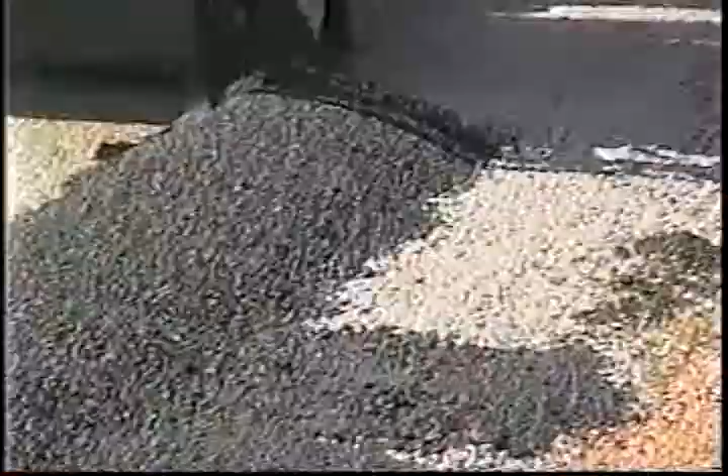The material we're using is hot mix type C for the thicker fills and type D for the thinner sections. Once we get the windrow put in just where we want it, we'll come behind with the maintainer, as you see here, and spread the material out.

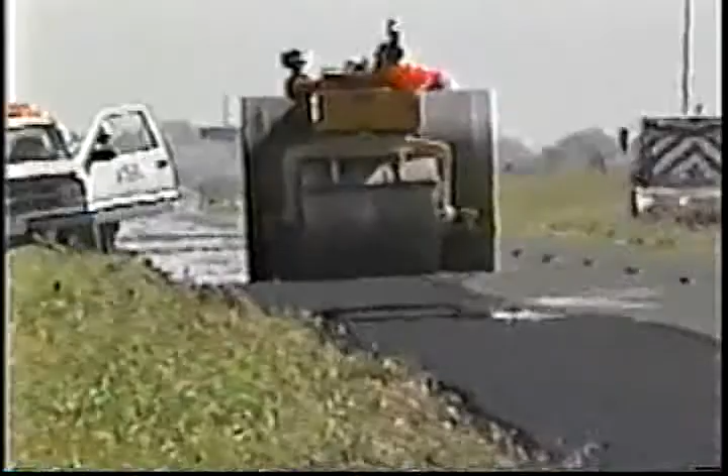The maintainer has an attachment on the end of the blade to keep the width of the repair uniform, keeping the material right where we want it. Now you're seeing the whole operation: placing the windrow, the maintainer blading the material out, and then coming behind with a steel wheel roller where we'll roll the material to get it tight just the way it needs to be.

This is a very effective approach for this kind of defect, and given the depth of ruts here, we spent probably about $14,000 or $15,000 per centerline mile on this repair. It's lasted very well. Earlier sections lasted about 4 years with no problem at all.

Of course, when we're done, we do have to pull up the edges. It's very important to do that, because otherwise we'll end up with more serious edge drop-offs than we initially started with. So that's a very important follow-through thing, which we emphasize in our area, something we have to watch out for a whole lot. We try to do this ahead of the seal coat work so that once we're done, we can place a seal coat to tie the whole road together.

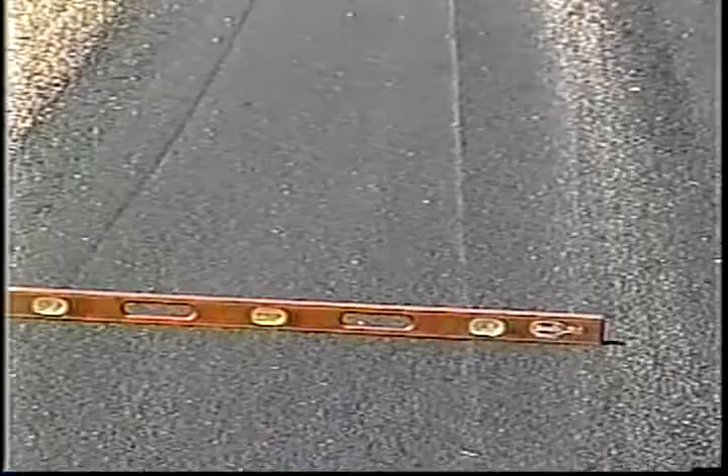There's a nice shot showing the completed edge repair section. Note that the rut and low edges are gone and we have a nice smooth road just ready to be sealed. That's it. Thank you.

Okay, thank you, Dale. Let me just go through that with you briefly. Again, this is the defect: the rutting, the quarter point failures, the edge damage.

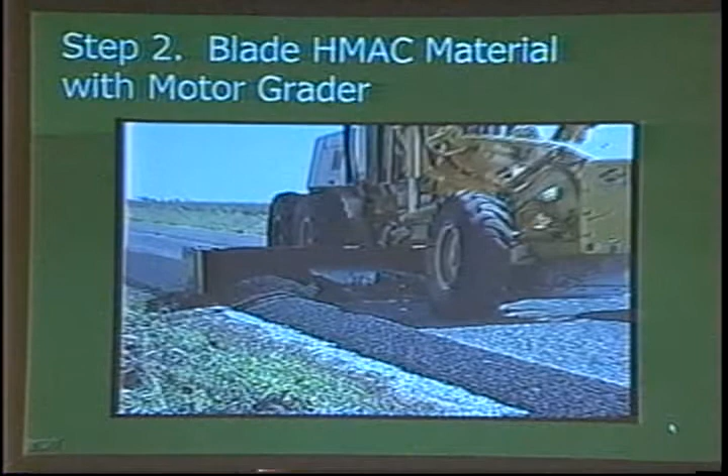The solution uses this edge repair with the tailgate attachment and the side discharge chute to place material along the edge, get a windrow there, blade that out with the motor grader using the attachment on the end of the blade, roll it with the steel wheel roller to tighten it up, and then it's ready for a seal coat to cover that up.

Data on this section of road - that was a pretty serious drop. The damage to the edge was pretty significant, so it used quite a bit of material. The average cost was about $14,000 to $15,000 per centerline mile. It held up very well. This cost a lot of money, but it's a good repair for that kind of application. It worked out real nicely.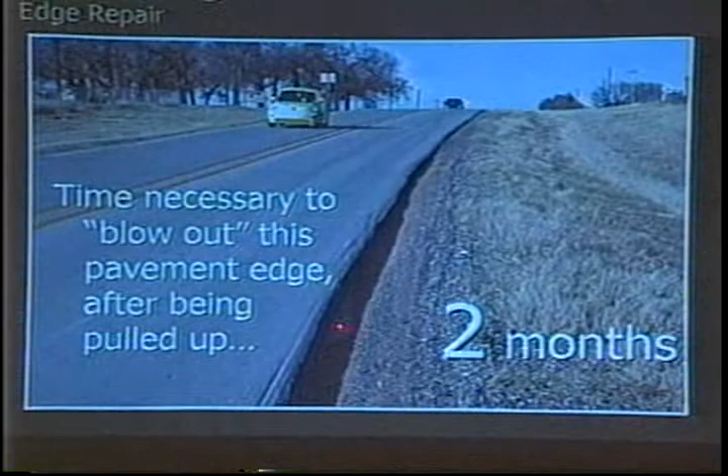Some places they go out all the time, and the idea is it's just a lot of effort, but in some cases this is an appropriate thing to do. But in other cases, like this one, where it blows out that bad after 2 months or 2 weeks, whichever it is, not very long, that's well beyond the TxDOT level of service criteria. So the idea of spending effort on pavement edge maintenance using pulling shoulders may be thought of as a short-term fix. It has its application, but it certainly could be thought of as a short-term fix. And I would say that this application was not very effective.

Wilbarger County, on the outskirts of Electra. Vegetation - now this was actually a repair, and this was one of those awareness things. This is kind of an insidious problem, insidious being difficult to identify, because everything looked good going into it, but then it just kind of went away. It kind of went south on them. And what happened was they had done an overlay on this section of divided highway, U.S. highway, and they had expected backfilling the pavement edges.

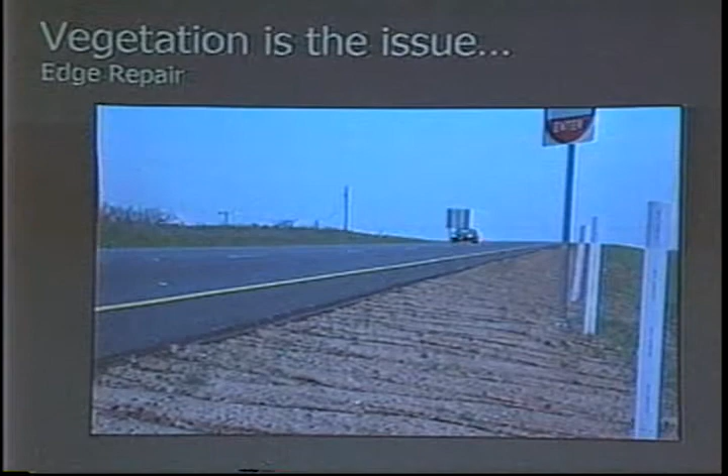They'd even specified material that was supposed to be the proper gradation so that it would support vegetation. But it turned out that the contractor who brought the material - it met the specification, but it did not have enough organic matter in it to support the growth of vegetation. It met the specification, but the specification just missed out on that one thing: it's got to be able to grow something. And it washed away, so they had to redo it. That's a sad thing, but sometimes that happens. Not necessarily a best practice, but one of the things we can learn is not to let that happen to us.

I've been talking about reshaping pavement edges. Again, this is the other term - replenishing with select borrow materials. Let's talk about replenishing for a moment.

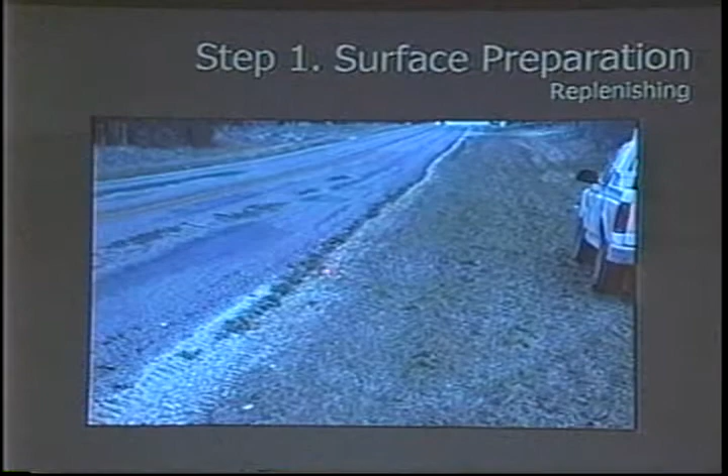Here's a series showing replenishing. This happens to have been taken in Mills County, on the outskirts of Zephyr, between Zephyr and Democrat, on FM 218. 280 vehicles per day. In this case, they had this narrow FM road with some edge drop-offs along the edge. Before they tried to replenish this edge, they didn't really have anything out here they could scrape up that they thought would do them any good, so they had to bring in material. They used base material. I'll show you in just a minute.

Before they placed the base material, they went along with the motor grader and cut a notch next to the road so they had enough room to put some material in so it would stay. That was the basic idea. They just bladed that out, cleaned it up a little bit. There they used a side discharge spreader to lay base material right along the edge, and then they would roll it with the motor grader blade and with the trucks and anything else that came along in their construction convoy. They'd roll it, shape it with the motor grader, and they'd be done.

It doesn't always happen that way. I do want to talk with you briefly about edge maintenance materials, the kind of materials that are used.

RAP, I've already mentioned this, gets commonly used. I saw different takes on this. Some places in the state, they've got more RAP than they can deal with. They've got mountains of RAP. The highest point of ground in Corpus Christi is their pile of RAP. The Corpus Christi district, I'll tell you, that's right - the highest point of ground in Corpus Christi.

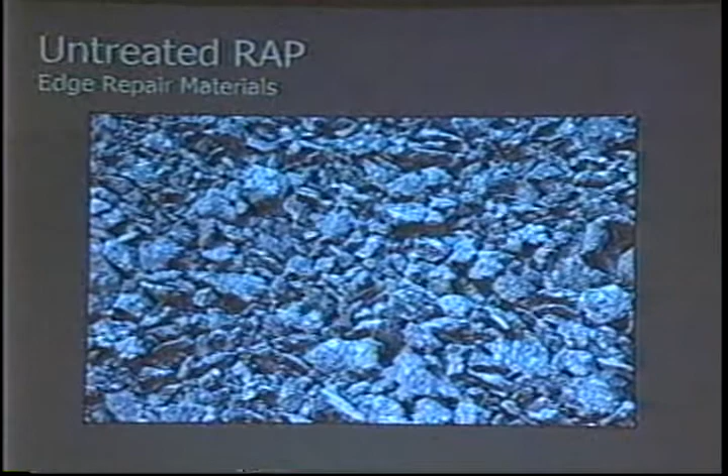This is a photograph of a really nice stockpile of untreated RAP, happens to be in Jasper County. Notice it's very uniform - nice gradation, very uniform gradation. It wasn't always this way. A lot of places we saw the RAP, there would be just large chunks of RAP, big as a hard hat or bigger. It would be contaminated with different kinds of things. So the quality of the RAP varied considerably. This happens to be one of the better stockpiles we saw.

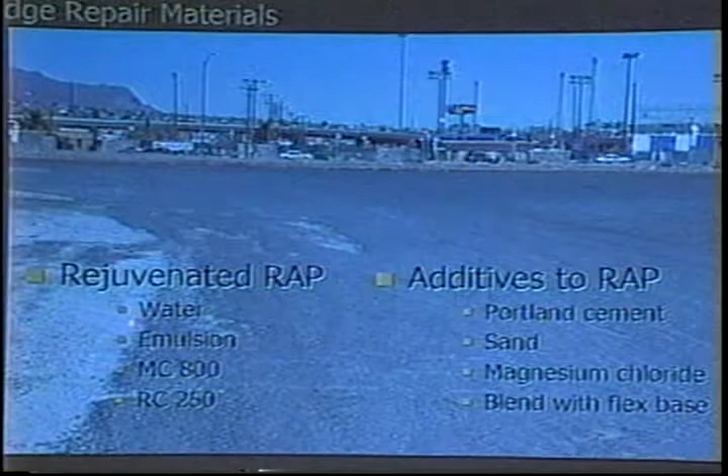By far the most common thing is nothing - they just spread it out and do something with it. But then we saw people add water to it, moisture condition it just like Flex Base, and that worked real well. That was probably the next most common after nothing. Sometimes folks would use asphalt emulsions, sometimes they would add cement to it. Some people tried sand, or this magnesium chloride. Sometimes they'd blend it with Flex Base or blend it with just native sandy material soil.

This magnesium chloride thing was kind of interesting, and so RMC1 is actually writing a research project statement to explore the use of this, to see if it could be effective for other applications, or maybe it was more the RAP than the magnesium chloride. They're going to look into it because the city of El Paso does it, New Mexico does it, TXDOT's doing it in El Paso, and it's working for them. Of course, it's hot out there, and there are a lot of reasons why that may have worked, and those factors need to be looked into, so maybe more will come down the pike on that.

Later on, some of the materials engineers, experts like Dr. Hossein, who helped me with this, Dr. Sinadira here, maybe some of those folks will get a chance to work on that particular project.

One of the fun things about doing this project, in doing the literature reviews, you find that a lot of good stuff exists out there that sometimes we've forgotten about. When you start talking about using RAP, because this has been so prominently used by the Department of Transportation across the entire state, including West Texas, you might ask yourself, how do I know what's the best thing? If I want to add something to it, how do I know what's the best thing to do? Well, it turns out there are a couple of publications, both of them out of TTI, the other guys wearing the maroon hats.

Guidelines on the use of RAP in routine maintenance activities - they did a study about which kinds of additives do the best job and achieve the best performance for RAP for various applications, and they wrote a little study. You probably have one of these in your district office, maybe in your maintenance section, but you can get one. You can call these folks on the phone, and I've given you a handout where you can read a little bit and get the reference. I'll just pass it around so you can have a look. But the idea is, why reinvent the wheel? Take a look at what other people have done, and you can benefit from that.

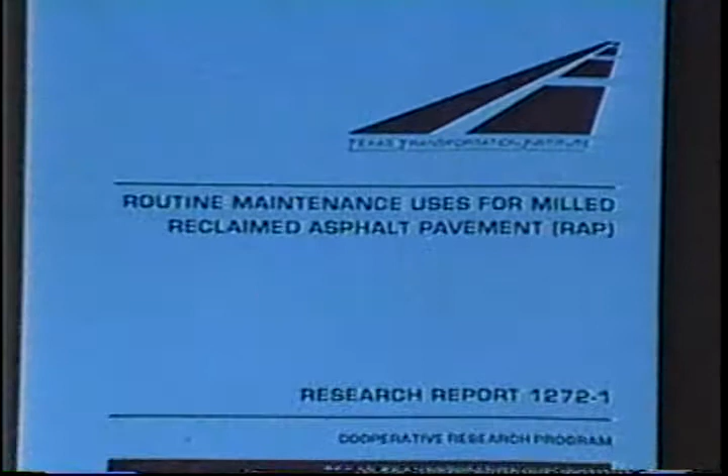This other one, routine maintenance uses for milled reclaimed asphalt pavement, just talks about different things that are used, the different quality of RAP, the amount of RAP, how it's stockpiled, how it's accounted for, different kinds of things like that. Also another very interesting study - you can get one of those. Let me pass it around.

Again, I gave you a handout so you can see the title on those, and you can purchase those or get a copy if you find something you'd be interested in.

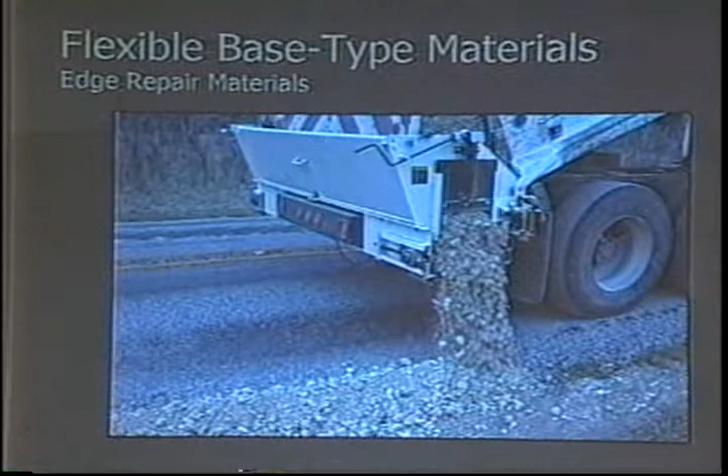Speaking of continuing to talk about materials used for pavement edge maintenance, of course flex base was often cited, often used. Different kinds of asphaltic materials were used. This happens to be in Hidalgo County, down in the valley, in the Pharr district. They were using limestone rock asphalt, LRA, different kinds of asphalt materials, hot mix, cold mix, all different kinds of things.

Asphalt materials were used for, I think, perhaps the most common material used in the state - get the answer to this - it's what you have. If you have RAP, you use RAP. If you've got flex base, you use flex base. If you don't have those and you've got to pay for something, well, you start going into your stockpile and using what you have. That's the idea. And after that, probably just in terms of volume, RAP showed up more commonly than any of the others. But the idea was, y'all are very creative, very innovative in the way you use these different materials. And what I'm presenting to you is that we saw applications where all of these things would work very well. The more expensive materials were usually used for the more focused applications. The material that didn't cost a whole lot, people were a little more generous with it.

Okay, that's the end of session 3. Let's go through the true-false quiz, and we're doing real well.

Okay, I have it in my hand. True or false: pavement edge maintenance expenditures mostly consist of work performed under Function Code 245, edge repair, and totaled $11.4 million in fiscal year 2001. Is that true or false?

Well, the answer is false. It's true that your expenditures for Function Code 270 was $11.4 million—that should have been, so that's an error right there. 245 is widening the road, 270 would have been $11.4 million. But what we talked about was that you do a whole lot more than just Function Code 270 or 245 or all those others. It's probably closer to 30 or 40 million than 11 million, maybe even 50 million. Y'all spend a lot of money and do a lot of different things on pavement edge repair.

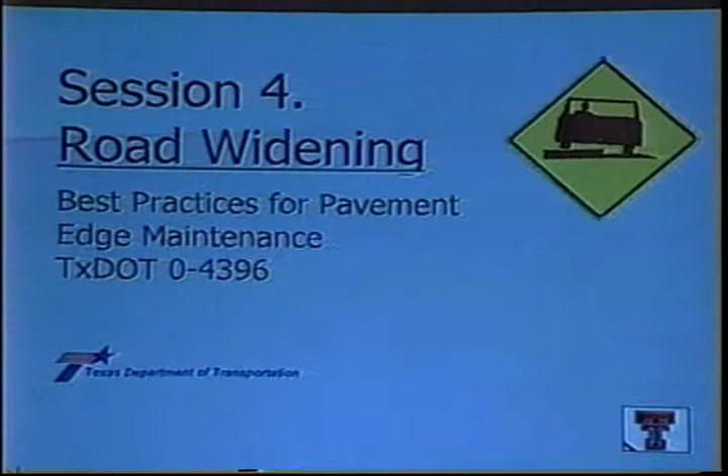As we talk about road widening, I guess I'd mention that to me this was one of the surprise findings of our research, quite frankly. When we began the research, I was thinking about the things I just got through talking about—different types of edge maintenance practices and procedures, that sort of thing—and road widening really didn't enter my mind. But as we traveled around the state and started talking to people, this became a very prominent feature in the types of best practices for pavement edge maintenance that you all are involved with. And so let's talk about it.

The basis for looking at road widening as a best practice for pavement edge maintenance—well, just recall that pulling shoulders is kind of a common thing that people think about. That's not a long-term fix. A lot of effort, repeated effort, with not a lot of long-term benefit that comes out of it. There may be other ways. Alternative repair scenarios are appropriate to consider.

When we started talking about road widening, and as we traveled across the state, we saw this appear in discussions throughout the state. Some people really believed in it, some people had real concerns about it. I've become convinced that it's a valid method for dealing with pavement edge maintenance.

Now, of course, there are some obstacles to overcome, and one of the ways I present this topic is to try to address all those obstacles. In other words, if people would say, well, I don't think you ought to do that, I'd ask them why do you think that, and I'd take notes, really wanting to understand. Every time someone said something like that, one way or the other, I would pay attention and try to write that down, understand it, and follow it out. So the summary of my effort in trying to understand this idea of road widening as a best practice for pavement edge maintenance deals with these factors. First, what I want to suggest to you is that road widening is the ultimate solution for pavement edge maintenance.

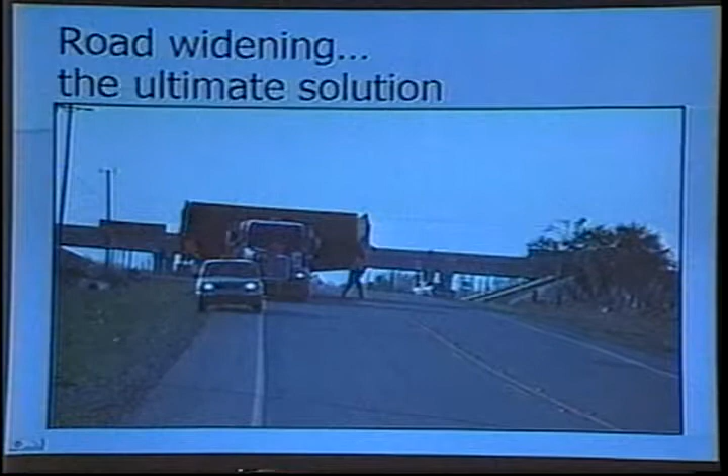Those were the factors, let's talk about that for a minute. I'll begin nationally. In addition to the nationwide, worldwide literature review, looking on the internet and things like that, I called maintenance directors in a sampling of states.

Let's look at some national examples. I'll cite just a few. In New York, I spoke with Edward Dennehy, the pavement and bridge preventive maintenance engineer. He said their roads have at least a 2-foot shoulder. Unless they get into off-shoulder maintenance, it's not an issue in New York. Notice it says their roads have shoulders, so it's not an issue.

He said, you need to talk to Pennsylvania. So I talked to Pennsylvania, and I spoke with Don Wise, chief of the PennDOT Maintenance Division. He said their road system includes dirt roads to interstates, and they instituted a formal plan 2 to 3 years ago to widen their narrow roads as a function of budget and manpower. They said, we're going to widen these things, we're going to ramp up, we're going to deal with the problem this way. There's a formal process in the state of Pennsylvania to achieve this objective.

Georgia is a little further along in this process than any other state I spoke with. I called Buddy Gratton, the state maintenance engineer - remember, these are all the people equivalent to Zane Webb. He said they instituted a program some 20 years ago to add 2-foot shoulders on all their roads. They did it 3 to 4% a year, phase by phase, selecting phases by a combination of width, speed, and traffic. He said now they are basically done with all their roads in that state, widened like this. And he is a happy man.

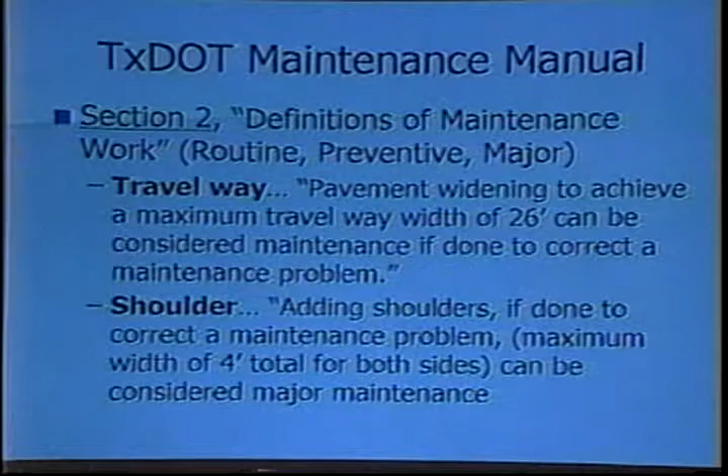You can do it. Shoulder, adding shoulders if done to correct a maintenance problem, and edge repair - edge drop-offs are a maintenance problem - for a maximum width of 4 foot total for both sides can be considered major maintenance. It's in your manual. I even included a copy; I know y'all have this, but I included a copy in your book of the section from your maintenance manual that talks about this. It is allowed, it is encouraged. It's something that is expected that you would view as a tool, something you could do if you wanted to. From a policy perspective, your division's going to back you on this.

The upshot of the conversation with Joe, and I took pages and pages of notes - Mr. Leverton back in the back who's helping with this was there with me when I did this meeting - is that first of all, districts should do this type of work, and there is a function code for it, function code 245, road widening. Also, the maintenance manual, according to Joe Graff, is written with flexibility to allow you the freedom to do what needs to be done. You all know what your priorities are. You're the ones that have more knowledge about your road conditions than anybody else in the state, in your section. You know about that, so y'all could make this, and just view this as an opportunity.

Joe's a strong proponent of preventive maintenance, viewing this as a preventive deal, not putting good money after bad, that kind of thing - it's a preventive thing. The only hint of a 'be careful,' the only thing he said to look for, is that road widening jobs should not be turned into what ought to be construction projects. There is a difference, and one of the things we're going to talk about is how you know the difference between those two. Let's talk about that - design issues.